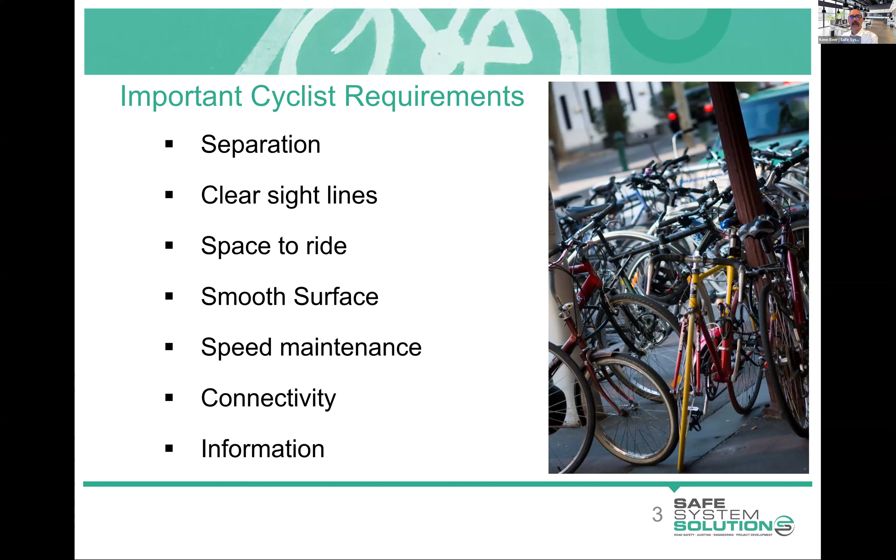So the easiest thing to do is to start by just thinking like a cyclist. The advantage we have is a lot of road safety auditors either are regular cyclists or have ridden bikes. So it's not that foreign an idea to be able to think like a cyclist and ask yourself all those logical questions. You know, how would I turn here? What would I see? Would I feel safe using this area? If I turned here, would cars see me? A door's going to open in front of me here. All of those usual sort of common sense questions.

The prompt lists I took you through at the end of last session, there is a prompt list for cyclists, and it will ask some of these questions to guide you along. And in some road safety audits, you might just decide, well, I want to ride a bike through this area just to get that feel of it. I'll talk to you at the end about specific thematic audits like cyclist audits where you absolutely have to ride a bike through it, but you can decide to do that at any point.

But really interesting, cyclists, people that ride bikes, it's quite a varied cohort. We have young people, so we have kids riding, we have older people, but we also have within the envelope of cyclists commuter cyclists, recreational cyclists, cargo utility style cyclists, you know, they're moving stuff around. It's quite varied, and we're seeing more and more integration of things like e-bikes, and it's quite a mix, and it actually makes it quite hard to design projects to cater for cyclists as a cohort.

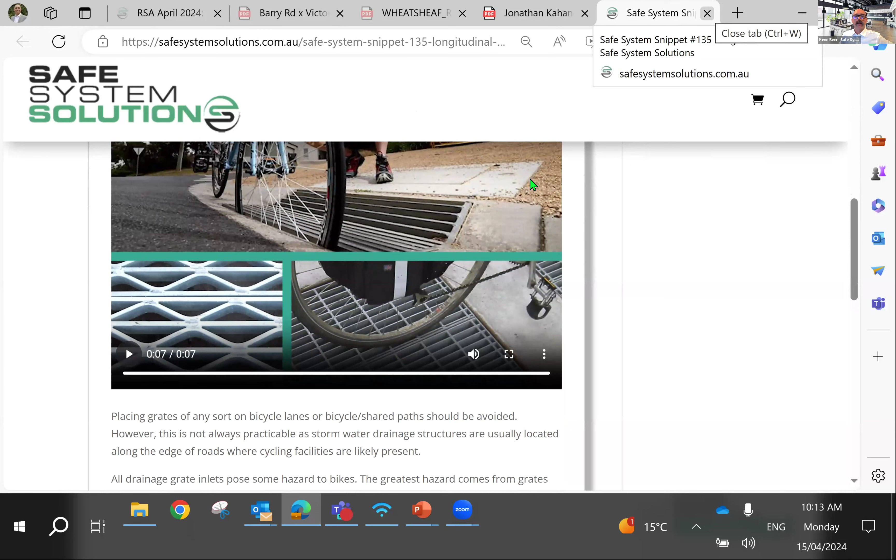Here you can see there's some bicycle-friendly grates. That's the common bicycle-friendly grate you'd expect to see. You can see these ones on a bridge, and there you go, cyclists going into it. Okay, get rid of that.

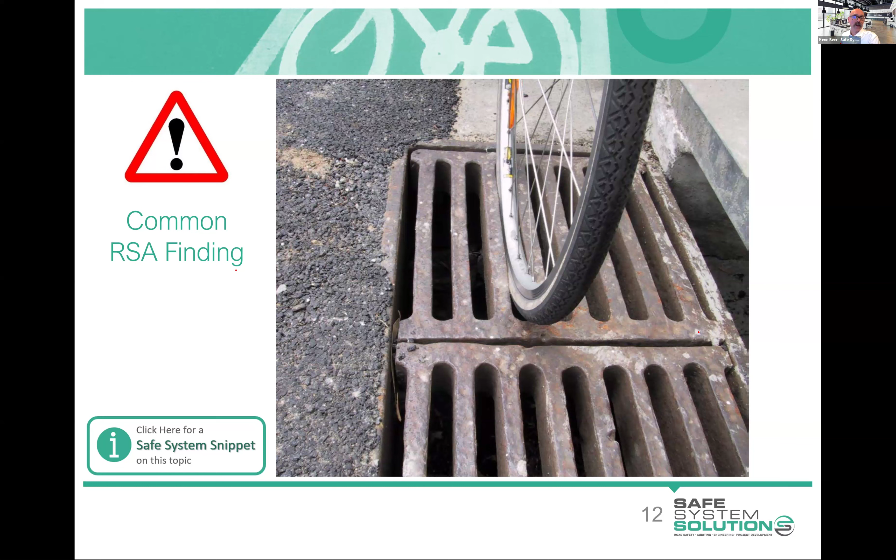I should say I haven't seen a longitudinal grate designed in a new infrastructure design for a very long time. But what I do see a lot of the time is that something like this exists, and they're doing upgrades to an intersection or changes, or sometimes even bike facilities, adding bike lanes, and they haven't identified that that's there. So they're not planning to change it as part of their work. That's where it often comes up.

This one, not as common, but signal phasing is probably a common one for cyclist safety. This one, they were doing all these bike upgrades on Sydney Road, adding green paint, bicycle storage boxes, some threshold treatments, and they were putting a bike storage box out the front of this set of traffic signals as well.

Except when you get out there and stand there, you notice they run the lights with green lights for those coming out, but also a left turn green arrow. So that's going to give the scenario where cyclists would possibly be coming up and storing at the front here. That's the purpose of those boxes, to get the bicycles in view so the cars know they're there. But cyclists might want to be going straight, and a vehicle behind them wanting to turn left.

As an audit team, we had long discussions about how you risk rate this, because we don't think anybody will miss this cyclist right in front of them, and we don't think anybody is going to intentionally mow them down. That sort of drifts outside the scope of road safety auditing to a degree. Anything in that intentional act stuff is not really road safety audit, nor is road rage, which was the big one we were worried about, because there'd be a driver coming up, beeping the cyclist, going, I'm allowed to be here, I'm meant to be here.

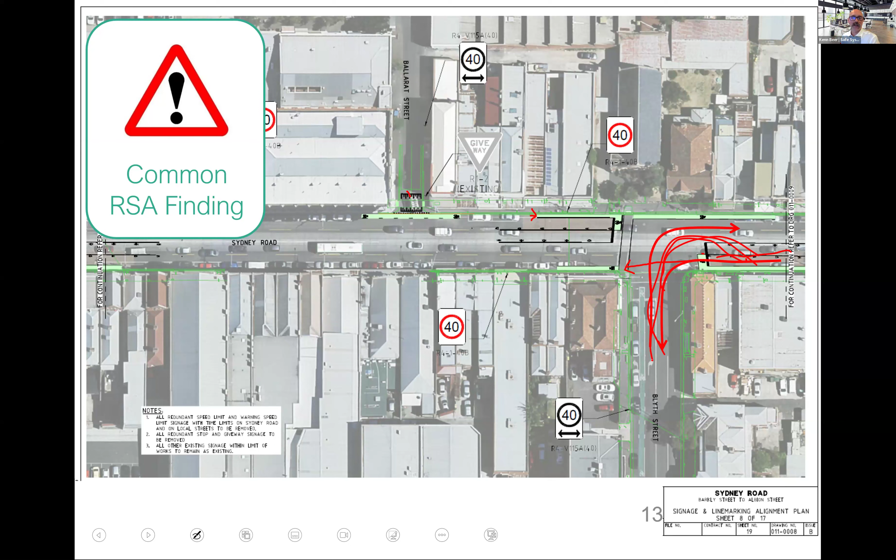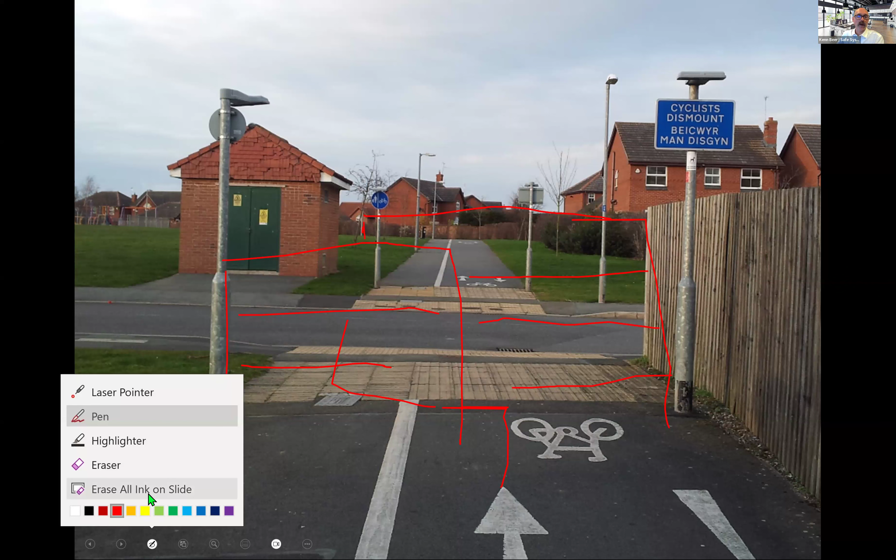That's been very strongly opposed by the riding community. It's not necessarily from a safety perspective, but it's things like a cargo bike just can't get around it. Any longer bikes, bigger bikes often can't get around it. It's a big disruption. So that's generally frowned upon. From a safety perspective, we know they do a reasonable job, but you've got to be a little bit conscious as an auditor making recommendations on something that's really against other design practices for one reason or another.

The advice these days is to more do it with things like splitter islands to try and slow and create that really clear point. But yeah, you'll be able to provide some advice as an auditor, and they'll take on what they believe is appropriate.

I thought I'd show this example of an audit that was done quite a while back, a slightly different form. Oh, it's kind of the same, but the interesting thing about this one, let me give you the background. So this was a big subdivision, and it was completed essentially. The civil public infrastructure works had all been done. They were building houses out there, and they had decided through that at some point to make their footpath a shared path facility.

Anyway, so that was one thing that was asked to be looked at in part of a post-opening road safety audit. And that's okay if your client sort of guides you at a particular issue they've got. You're still going to look at everything else, but you'll look at that issue.

Anyway, we looked at it and then identified that in some of the locations there was a high fence and the garage was there, and now we had a shared path and we had the vehicles coming in and out. And really, we were then encouraging cyclists, and cyclists of higher speeds, to be using that area.

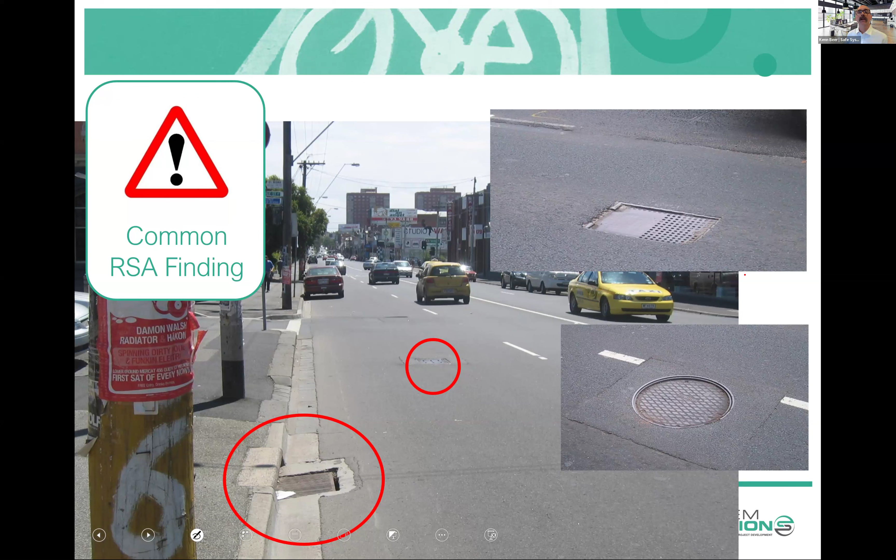Now, surface issues. We've got pits, grates, pit lids, surface covers, all these things in the road environment. Cyclists will potentially be destabilized by these, but they will also avoid them as they see them, so they change riding lines, and that can actually pose some dangers. Just have a think about that as well.

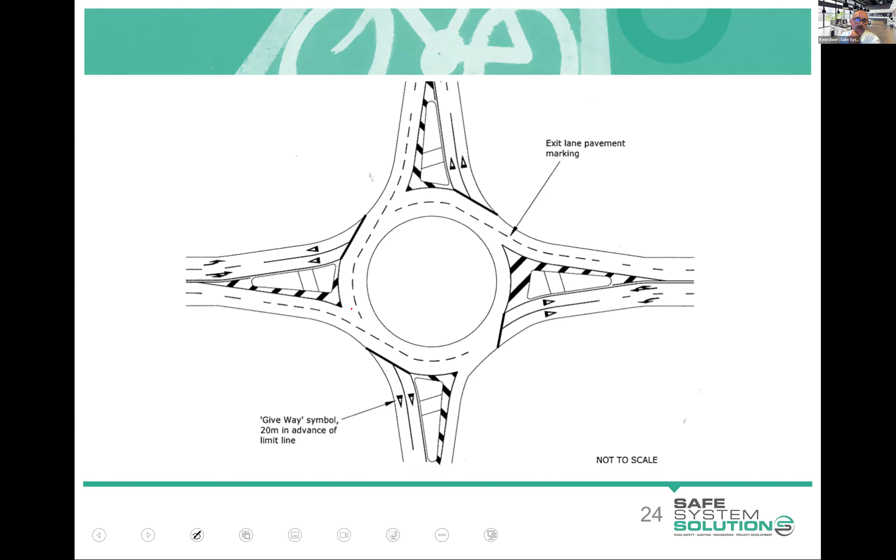I'll come back to some more best practice design for single lane roundabouts, but I'll just explain the complexity of a 2-lane roundabout if you've got a cycle route through it. The Dutch will just say, okay, if it's a 2-lane roundabout, it's grade separated for cyclists - they'll have their own overpass or underpass. But in Australia, we do have a lot of this, so we ask: are there facilities we can provide? We have tried different designs with some features for cyclists, separation at the roundabout - that bit of separation does help, not mixing them in the traffic, and providing facilities to get through, better sight lines, better angles, better storage points. But it is a very hard scenario.

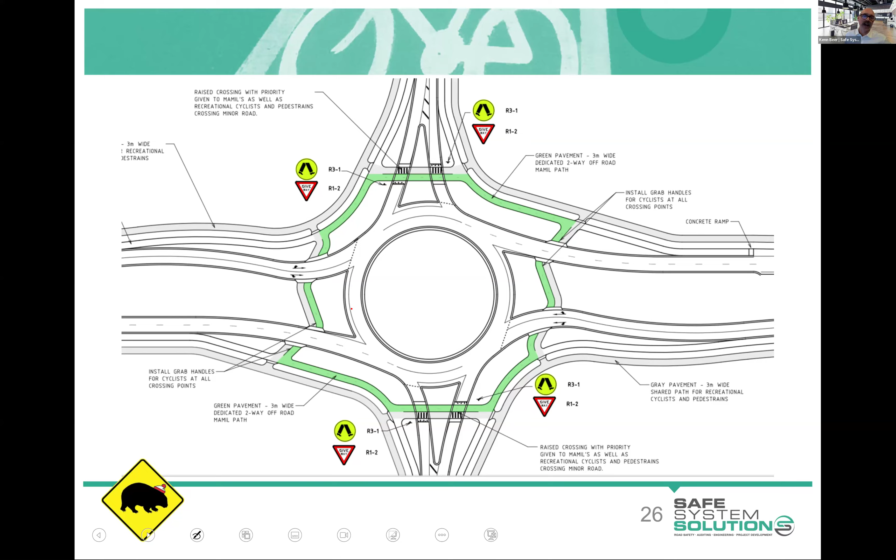The single lane roundabout, though, where we understand best practice is Dutch-inspired protected roundabouts, where you have a circulating carriageway for cyclists and pedestrians, if you have pedestrians there as well, and then an inner circulating carriageway for passenger vehicles or other vehicles.

So you can see that one here, that's Moray Street. There's a link there to another snippet on this one. There's pictures of it built, and you can see the cyclists can get on that and circulate around where they need to go, protected away, with a bit of buffer area for the vehicle. You can see coming in here, it can store here, waiting as cyclists come up, and the other vehicles can get around. So that works pretty well.

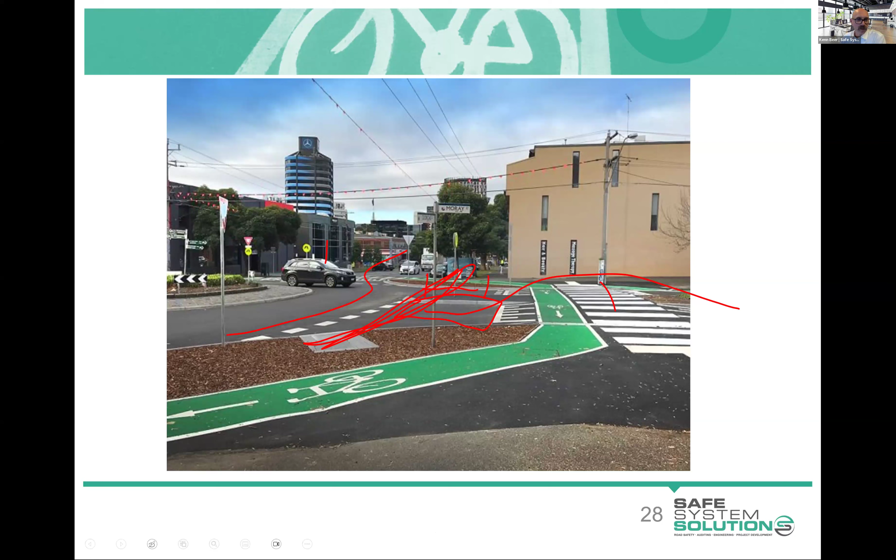That's a helpful one as well, because the driver can get into there and wait, as opposed to if you have your crossing point right up here, then vehicles are usually storing over the crossing point for cyclists or pedestrians. Sure, if you've got a longer vehicle with a trailer or something, you're still going to be hanging over that. But this works really well.

We did evaluate it. We had cameras out there for a few weeks, monitoring things. Really great compliance - high 80% of cyclists using the facility, with others just running through like a normal roundabout. But lots of good use of it, and vehicles slowing down nicely, giving way. We were really impressed.

As auditors, we're going to see a lot more designs come in that are trying to be more proactive in encouraging riding, and that's great, we do want to see that. Our role is to ensure that we are having that safety focus on it. We can get caught up as an industry pushing for something that increases mode share in a particular mode at the cost of safety. Our role is to ensure that it's not at the cost of safety, that we're doing it in the safest manner. Now, a lot of the time, improving safety improves mode share too, you get more people riding and walking because we made it safer. But occasionally it may not.

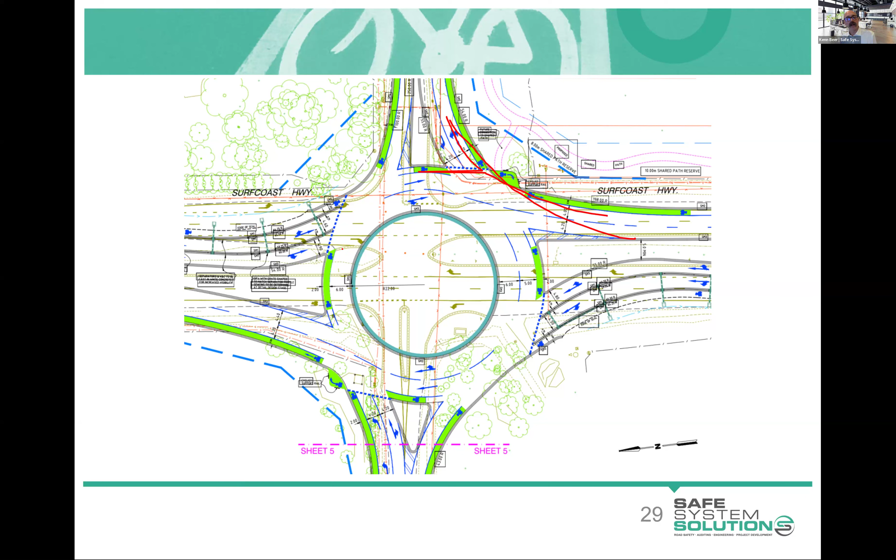This one was an interesting one where they were proposing this little two-lane roundabout, very hard, as I say. Everybody's trying to innovate, trying to come up with new ways to do this. So they had some separation, and then for the right-turning cyclists, there was going to be an area to prop and wait. The audit team was concerned with a couple of things: understanding who uses this area, the fact that these are recreational cyclists and there's a few of them coming in - not many would be able to prop here, maybe one possibly, but the others would spill out. Second, you've got larger vehicles coming around, and we know this area is a little susceptible to a sweeping vehicle, so it's not great from a storage perspective. So it's probably not the best, though we appreciate they're trying, and we can help them think about other options or other ways to design it.

This is an interesting one out near Traralgon. At the design phase it looks quite impressive in the sense that they're planning a dedicated cycle facility through the roundabout, a separated cycle facility, which is great, so cyclists aren't mixing with all the traffic as they go through. Now, it didn't cater for the right turn - I haven't got that second sheet on there - but the bulk of the traffic was going straight through, as in cycle traffic. So it all looks good.

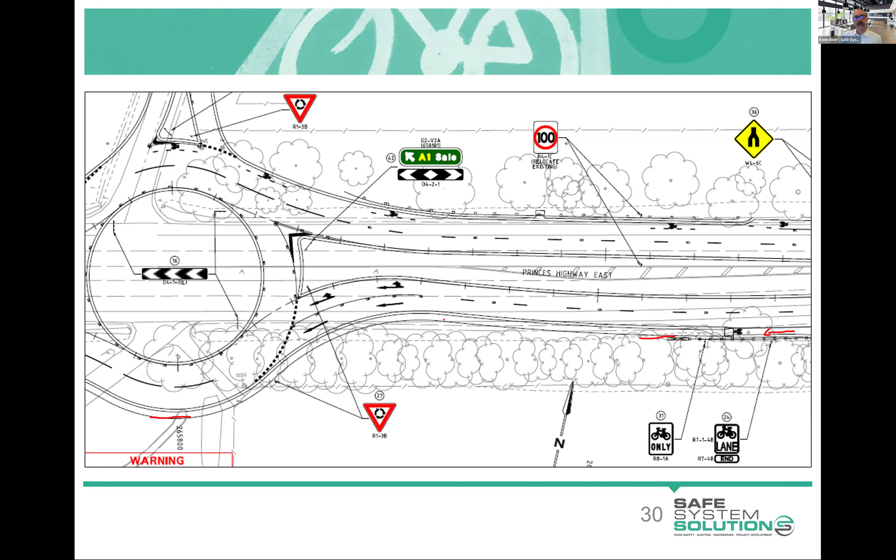But the important thing is thinking about how it then gets rolled out, and why post-opening audits can be really helpful. Once you get out there, you go, I don't know if cyclists would actually know that that's meant to be a cycle facility. We've got a little cyclist-only sign, but it's pretty small, and cyclists coming up here may just enter into traffic. So I think the little tweak of adding just a bit of green paint there would have absolutely done the job, to just say that's for cyclists and up you go, you get your own separated area.

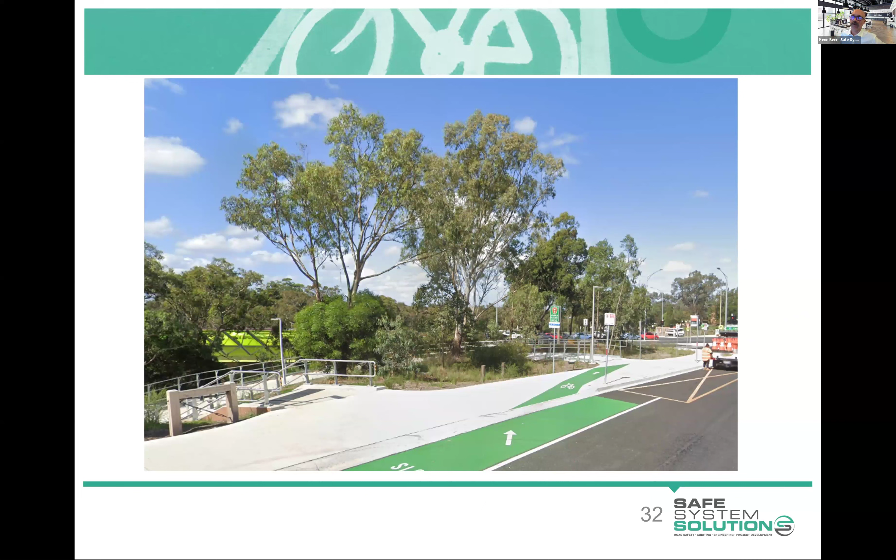Now, it's not the traditional use of green marking on the pavement. Green marking on the pavement was traditionally done at a conflict point between a vehicle and a cyclist, to alert the vehicle driver that a cyclist could be coming at this location, and to be more alert. But as you can see, here's another example of where it's used to try to guide cyclists to a particular point. There's an underpass here, and they're trying to encourage cyclists to go under if they want to go through. So it's a different way of using green marking.

Dooring is another issue that you'll be identifying as an auditor, no doubt. Dooring is simply opening the door in front of cyclists. The bulk of the deaths we've seen around Australia and New Zealand associated with dooring have actually been a secondary impact - they hit the door, which doesn't kill the cyclist, but it's where they land then in traffic and are run over or struck by faster moving vehicles running alongside. The hitting of the door itself can be pretty serious too, that's for sure, I'm not saying that's not an issue. But this has, and continues to, cause a lot of challenges. We have areas like this which are extremely challenging - again, Sydney Road.

The reason it's so challenging is that it's a clearway. So at points in the day, if you wanted to just paint all of that green, at some points of the day that's the middle of a running lane. And just painting it isn't actually going to really alleviate that issue so much.

So here, this one isn't a clearway, but this is the site of one of those dooring fatalities, and it's marked and it's there, but we aren't really providing the best facility to separate there. But Copenhagen-style bicycle facilities are what we know is extremely effective in reducing dooring issues. That's where you put the cyclist at the curbside and you put any parking out into the roadway.

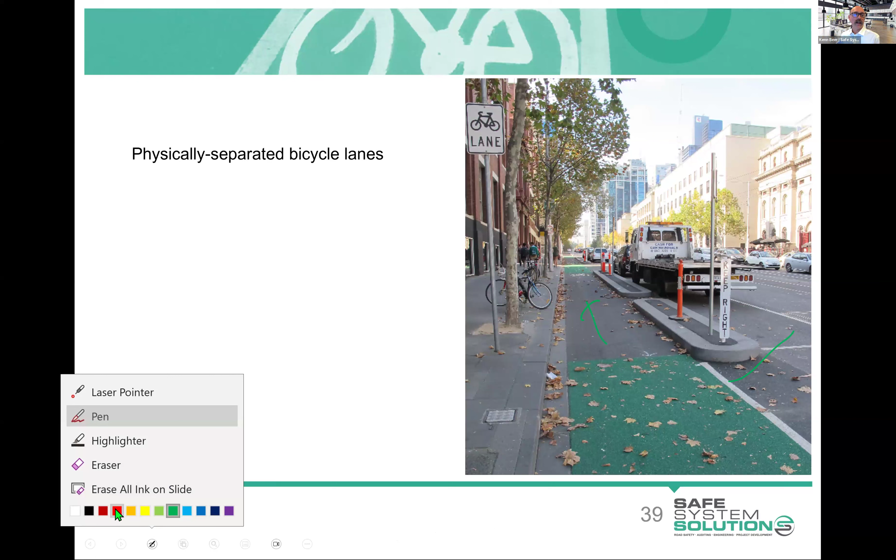And if you undertake road safety audits of facilities like this, it is inherently safer, but there are tweaks that can be done to make it even better. Some of the issues we have are certainly around these conflict points where vehicles are coming in and cyclists are coming up, and we don't have the best sight lines, often because of parked vehicles. So you can talk about where parking would be.

One little trick and tip, and I put it in most audits of these that I do, is to make the turn point a sort of cobblestone or a raised area, just to really slow the vehicles right at that point. So the cyclists have got time to see, okay, a car's coming, and slow down. Are they going to stop? The vehicle sees the rider.

There are other bits and pieces and tweaks which you pick up when you're out there on the ground or looking at the design and pondering how a pedestrian is going to handle this, how disabled parking is going to work, that they can get to a point to get up. And drainage is one where it's more in the design. Rarely as auditors are we picking on drainage things, but they'll create gaps and bits and pieces in order to get the water through. So we think about how that plays out from a safety perspective.

Certainly the width of it, you want it to be wide. At some point, people will park in it and drive in it. We saw that for quite a few that were quite wide, and taxis used them as a storage rank for a while. And so you might have to think about the entry and how that's done.

And certainly the first point of it, you might have vehicles hitting it, cyclists hitting it, cyclists coming behind other cyclists, and you've got to think about how you pre-warn and line mark and make sure that it's very clear that they're going to come into something and they have to get to the left of it.

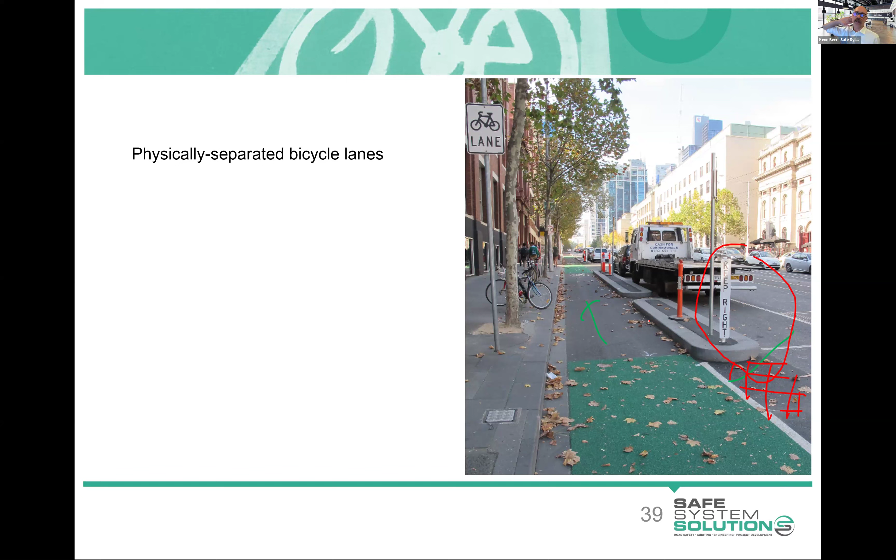So when you have a shared path and you cross a road, there is the option to give the shared path priority. This is a bit of a mess of road rules and how it plays out, because in a number of jurisdictions, you are not allowed to ride a bike across a pedestrian crossing. So they couldn't just make it a wombat crossing or a zebra crossing, because technically it would be illegal for the rider to ride over it. Now, the reality is cyclists just ride over pedestrian crossings anyway, but you can't really build things that go against the road rules, if that makes sense.

So this one is an interesting one where the design team have really been thinking about safety in the sense that they've put a barrier system to separate vehicles from getting onto this shared path that they're building. And so that's really great from that vehicle perspective. The bit that hasn't been thought about, though, is a cyclist striking the back of that barrier system. And if you've ever seen the back of those barrier systems, it's a pretty sharp, strong metal area.

And we certainly have seen some horrible crashes involving cyclists hitting the back of those barrier systems, and runners as well. But the cyclists are obviously going more speed. So you can look to back-to-back W-beam them. There's lots of barrier products available, like ones that are much thinner than this as well. So back-to-back systems, plastic covers, post capping. There's lots of different things available.

Again, as an auditor, it's probably not your role to give them the absolute answer. Identifying the issue and telling them to have a think about some sort of protection on the back of the barrier system is a good one.

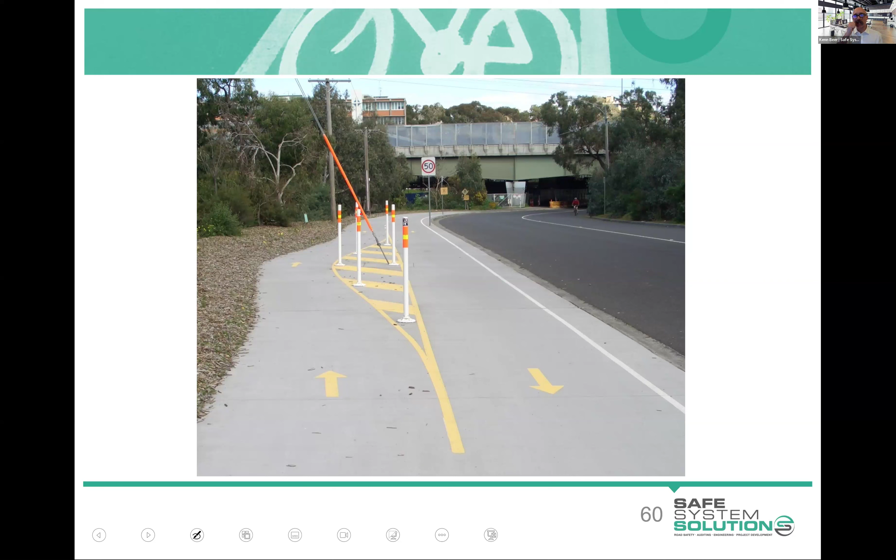We do have these thematic audit fact sheets, which we put into the learning management system, so you'll be able to have a look at them. They just explain a little bit of those. If you're asked to do a cycling-specific road safety audit, what is the actual difference? Because the process is still the same. It's really around how you go about it, that you ride the route, having a look at some specific features for cyclists as well.

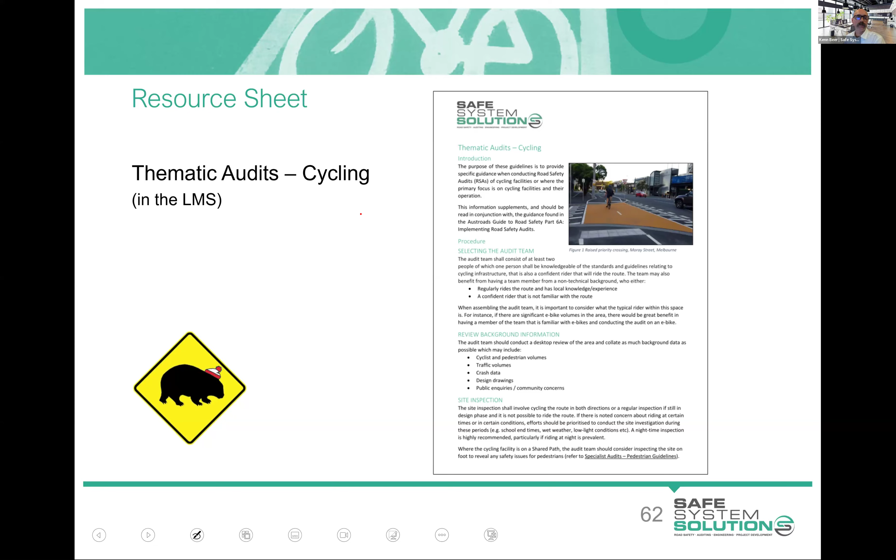Where are we going on time? It's right on the hour. I don't think we'll do that quiz, Loretta, if that's all right. I'd rather give people time to have a stretch, grab a coffee. Let me talk to them about motorcycles for a bit and give you enough time to take them through their audit findings. So what can we take? What do you say? 4 minutes? Sounds good. All right. See you in 4 minutes and we'll get back into it. Thanks.

Okay, let's get back into it. We're going to talk about motorcyclists. This is a road user group where a lot fewer auditors are motorcyclists than cyclists, and a lot fewer have ever been on a bike, or at least on a bike on the public road network. So I think it's important for us to get a few things in our mind about what to look for the safety of motorcyclists.

I was doing some Austroads work, and we're doing modelling of death and serious injury out to 2050 in different jurisdictions. As you start to see over the next 20, 25, 30 years, motorcyclists start to dominate our road trauma profile. Vehicles get safer, autonomy integrates in, and a lot of the road upgrades that are planned and coming online are protecting vehicle occupants, and to a reasonable degree pedestrians and cyclists. They're still overrepresented in these future scenarios, but with motorcyclists, it's eye-opening how much trauma there is.

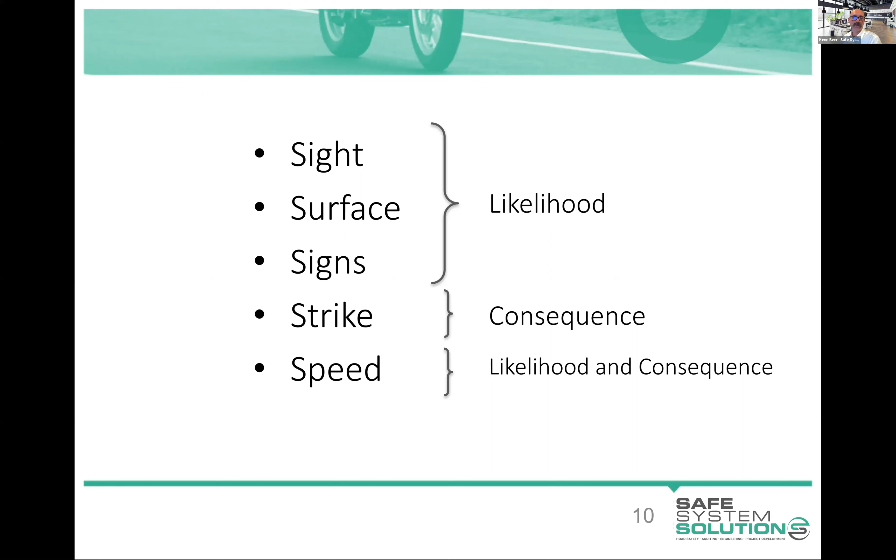So what I'm going to do is jump through each of these S's one at a time. I don't have a lot of slides on each one, just enough to spark that thought in your mind. If we think about a motorcyclist compared to a vehicle, they are smaller, so they're hidden behind objects more. You can see there, even a very small car, the difference in width.

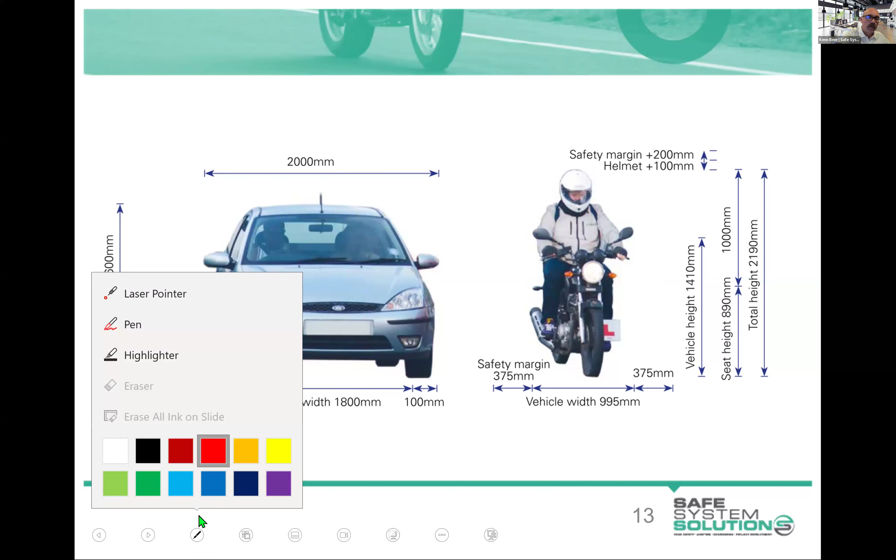So I'll give a question and give out some more prizes—make sure you're all back and listening. Why do you think, what is the purpose of this safety margin? Not that we would really use it too much. This is thinking about design envelopes for different vehicles, but why a safety margin that big when the vehicle's only got that 100 mil essentially, a little buffer? Any ideas?

Speed wobbles—that's not a bad one from Nick there. It's in the general direction. Saddlebags is another interesting one. Yeah, the lean is the one—Andrew's on it, kind of links a little bit with speed wobbles, though that's a slightly different thing. I like all three, but we'll give Andrew the prize. It is about the amount that a rider will lean to make turns around corners or curves.

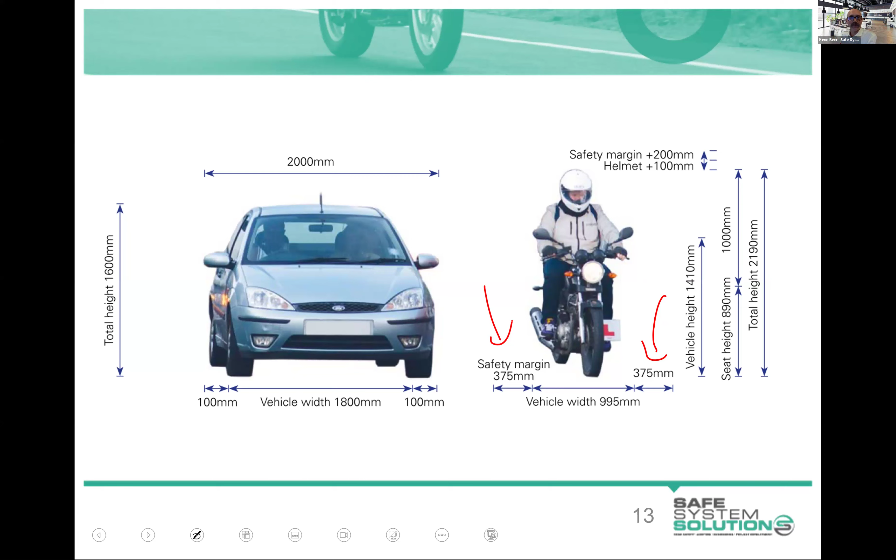We also want to think about where vehicles will prop, and that's, as an auditor, a really important thing to do. When you're given a design—an upgrade to an intersection or changes to the configuration of an intersection or an area—you say, okay, that's how it looks, but how will it then operate? Where will vehicles prop? What sight lines will be blocked by other vehicles? Just having a think a little bit about that. I'll show you a little site where that became an issue shortly.

So we want to provide riders with good warning of what's coming up, especially on those motorcycle touring routes, so they've got a really good understanding. Motorcyclists are very attuned to road signage, so we have the advantage that we can warn of different features and they'll react.

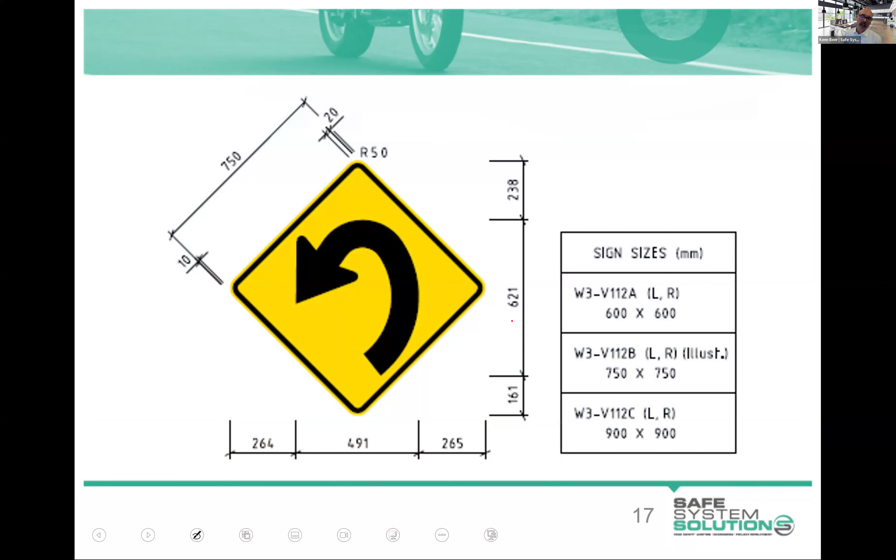This sign is used on the approach to a curve that tightens. Now, this is different to a hairpin curve, which would have one tight radius. This is one that tightens up. Now, I'll give a prize if somebody can tell me the technical term for a curve that tightens like this, that has two radiuses—one radius there and then a tighter radius.

Broken back—that's good from Mark, Mark can have a prize for that. It's not the actual term I was going for, but it is used. And Abe's got it: compound curve. Well done, there's a prize there as well. It is a compound curve.

Compound curves are extremely hazardous for motorcyclists. Now, they're not great for four-wheeled vehicles either, but this is a compound curve—and it's not even the most severe compound curve you'll find. A rider comes in and positions themselves, setting up for a 252 radius curve, and then it tightens up a bit. That means the rider is set at a speed, a lean, and a line, and then it changes on them. This has had 4 motorcycle run-off-road crashes to the outside of this curve. It probably also has an unsealed road dragging a bit of gravel on there, which compounds the issue. There you go—I just used an issue compounding an issue on a compound curve.

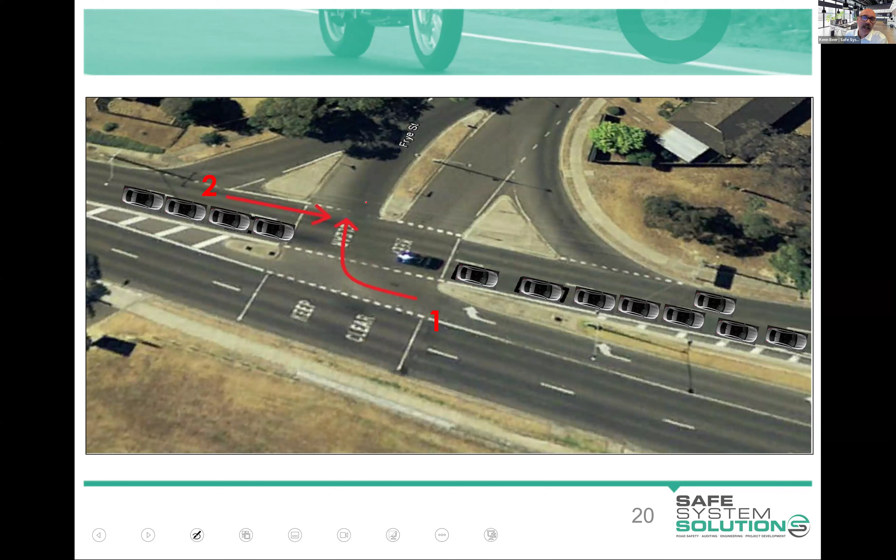So really, the principle to take out of it from an auditor perspective is that while some things we may not think about as sightline constraints, they could be. And if we have the ability to open up sight triangles from even small things like trees, signal controller boxes, different signage and the like, it can be helpful.

Okay, surface. So it goes a little bit back to that lean we were talking about. We talked about the lean from a design envelope perspective, but if you think about the lean and the importance of the surface, we have this huge reliance on the surface in the sense that the center of gravity has been pushed out, and all of the ability to retain staying upright is reliant on the surface traction there.

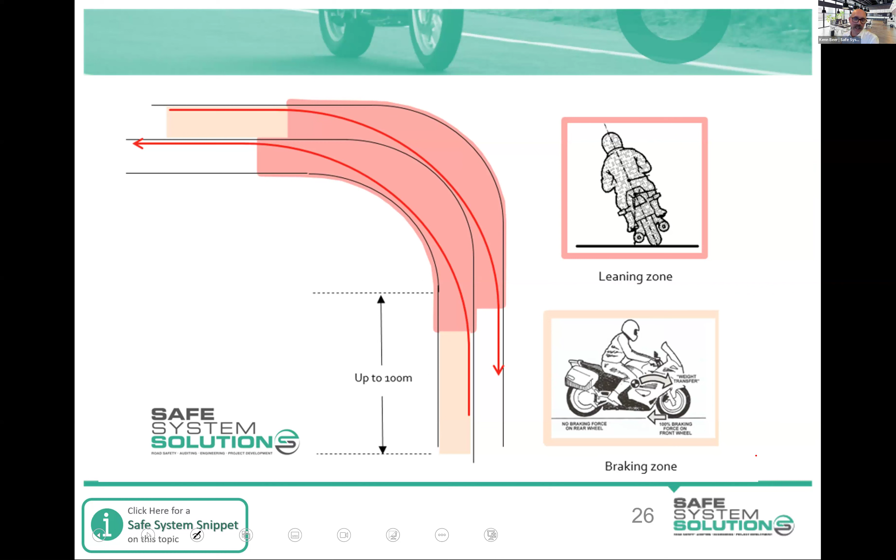So those are the areas. This is a diagram showing where a rider is leaning through a curve - that's the most important surface for a rider. The approach, where they're braking to a degree, and the rest of the road network surface can be an issue, but it's not as much of an issue.

So we want a really good, consistent, good grip surface - no surprises is what we want. Unfortunately, that's not what we see out there, is it? We see...

Depressions in the road - that's one I've done a couple of motorcycle fatality reports on now, associated with riders leaning on popular touring routes, where there's been a depression in the road like this. And what it does - it hasn't knocked the rider off, but on both occasions the rider has had to pull the bike upright and go into the opposing lane to hold control of it, and been struck by a vehicle coming the other way.

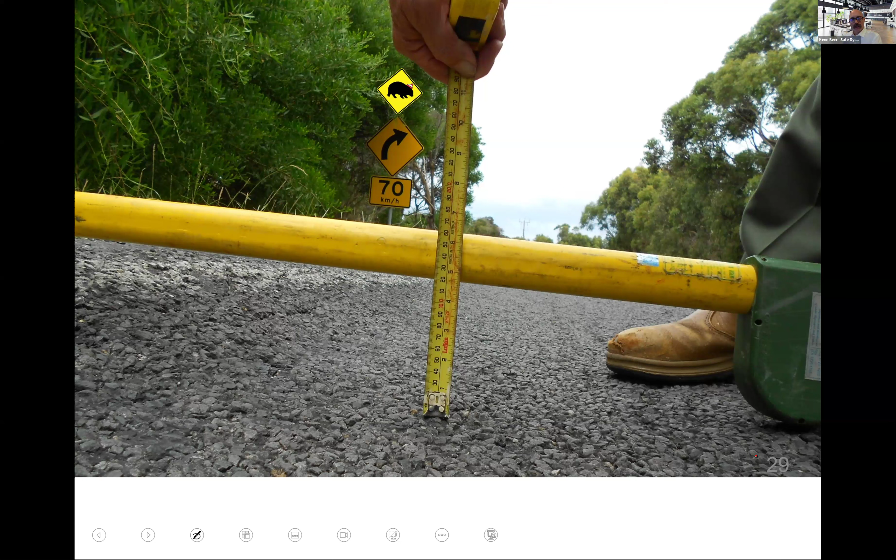So these depressions in the road - I mean, this is going to be an issue for pretty much any road user - but different potholes and those sort of things, obviously issues. Any sorts of surface changes can be an issue.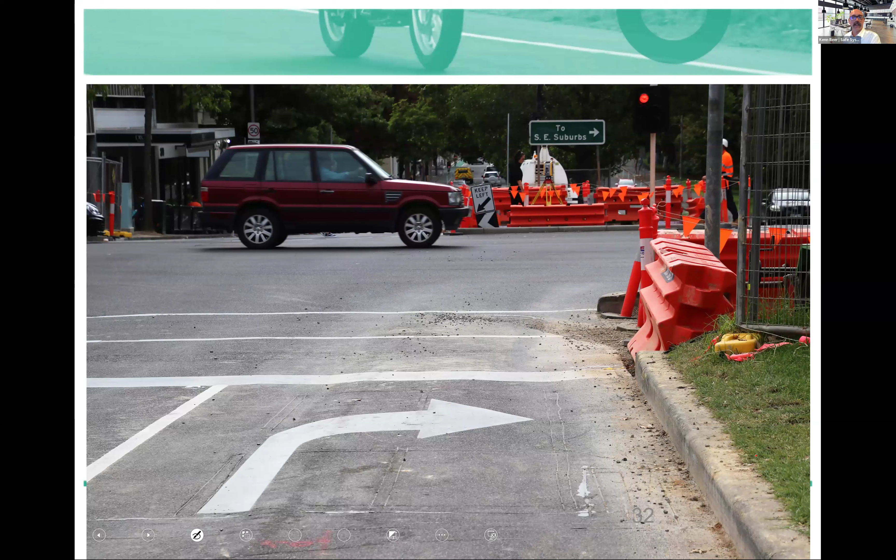Around work sites, the debris, the gravel and things - this isn't at all the worst I've seen, but I had an immediate photo of one where we've got to think about motorcyclists, and we're seeing a lot more of those food delivery drivers and those sorts of things. I think I have a picture later of steel plates, but that's also often used around work sites as well.

And also scouring out of the pavement, leaving drops and lips and things that really are enough to destabilize motorcycles or bicycles for that matter.

Patching, and where we have the connection there, often in the riding line, things will break up. So if we're able to do full width patching, that's great. And anytime we do have these sorts of issues, we really want to warn the rider in the time it takes to actually rectify the issue.

This is a very problematic one. It's on a popular motorcycle touring route, around a curve. A rider is going to be coming in, and really they're locked into a line and a speed, pretty much. They don't have the option much to go inside this - all they could really do is go outside it, or pull the bike upright and try to regain that, which would put them onto the other side of the road.

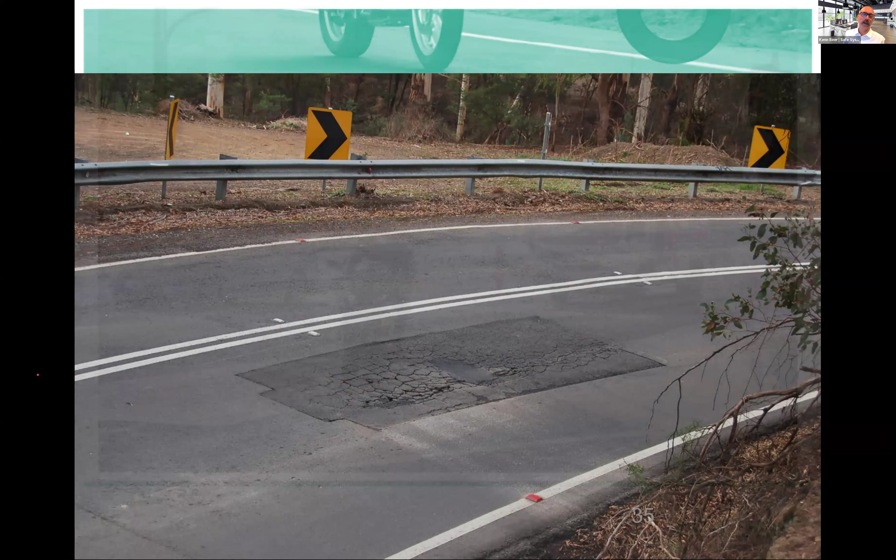Try not to do that, and we certainly would pick it up as auditors. It's going to be unavoidable in some situations, but certainly warning of it, adding skid resistance surfacing to it, because when it's wet and dark and the motorcyclist is following behind other vehicles, it can be a pretty hazardous scenario for a rider. And there are good different treatments available.

Any pit lids, services, anything you're going to see in a design that's in the circulating carriageway or roadway at a design stage, we want to try and get that out. And if it's there already, we want to try and highlight it better. So it's one at a roundabout, and you can think that a rider's leaning a little bit. They're also very much looking for all these vehicles that are going to pull in front of them and where they're going.

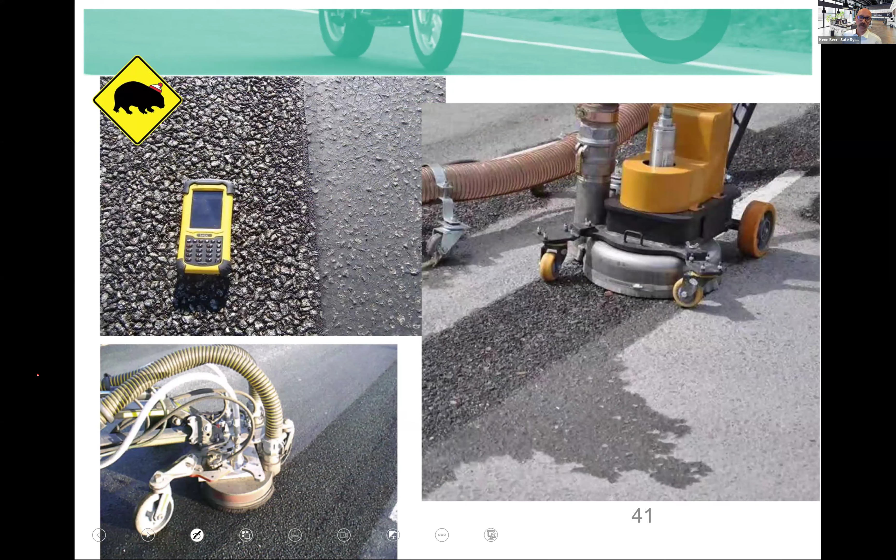Yeah, we really don't want that sort of stuff. And improving surface conditions, all sorts of ways we can do it with water blasting or different high skid resistance surfacing techniques and the like. So lots of options available to us. There's some high skid resistance surfacing as an example.

Sealing right up to the edge of a barrier is another thing that assists motorcycle safety. A rider, if they were to go into a curve too fast, and it's an unsealed area, they really have to pull the bike upright or they're off, and that's it.

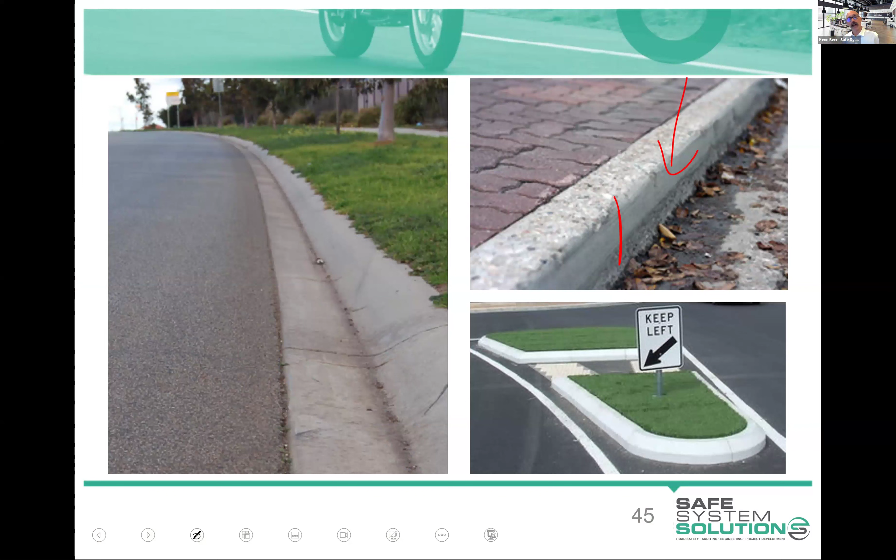And curbing—the more mountable the curbing, the better for a rider. It just gives them a chance to stay on the bike. Barrier curbing, which is this one with the vertical surface, that will knock a rider off. And in fact, it doesn't need to be a big lip to knock a rider off. So if we are doing concrete aprons or anything like that, we want to be clear at highlighting that.

Okay, so another surface thing we use a lot of is line marking, and line marking can be slippery. Thermoplastic line marking, when wet, after it's been out there for a while and polished up a bit, becomes a slippery surface. So we just don't need to use big swathes of line marking like this. There's other ways to do that, and we want to be very careful with it.

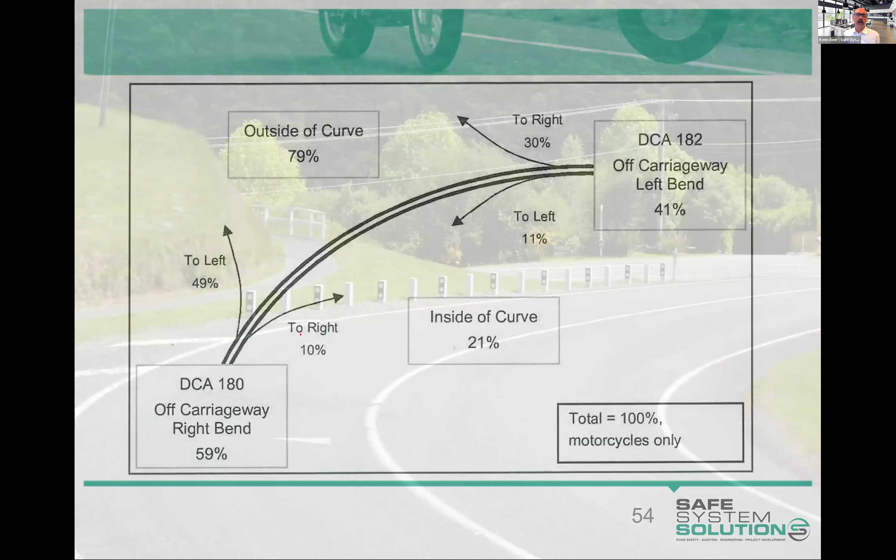Motorcyclists leave the road on the outside of the curve predominantly, and that's where we see most of the crashes. So we really want to think about how we are treating the outside of curve on popular motorcycle routes, and really other routes as well. Here you can see we've got a bit of a surface issue, which isn't going to be great.

Galvanized steel posts - ASBAP, the Austroads Safety Barrier Assessment Panel, who look after roadside hardware and approve things - well, they don't actually approve things, they endorse them - but they have this category of stuff they say is deemed frangible. So they say, well, we deem that frangible, meaning that even in areas you're trying to make clear of hazards, you won't even consider that a hazard. And they would call standard galvanized steel posts deemed frangible.

But I'll tell you now, they're easily strong enough to kill a motorcyclist. So the deeming of frangibility by ASBAP is for passenger vehicles. It is not for motorcyclists.

So what I say is, of course we need signage out on our road network, and of course we need sign support structures for it. First and foremost is to think about, can we just get rid of some of these? Can we consolidate these? Do we need this one? Probably not. Can we combine these two? Probably yes. There's opportunities immediately to try to lessen the amount of signage out there.

Then in some situations, you may consider a more flexible sign range. Certainly low mount signs - there's quite a lot available on the market. We have these sort of compressed rubber ones. We have ones with hinge points at the bottom. Different things that you can use.

So for the rider sliding, having separated from the bike and sliding along, we have underrun protection available to us. I use the term underrun protection - there's a variety of types of ways you can do it. A lot of people talk about rub rail. Rub rail is one of the products available. There's MPR, Biker Shield, and a few others.

So that's quite effective. You can imagine a rider sliding along off their bike, hitting a post. They're going to abruptly stop, and that's going to be a pretty severe incident. With the underrun protection addition, they slide, they hit that, they run along it a bit, and it's less severe. That can be retrofitted to existing barrier systems.

So Type B, W-beam in Victoria, and G4 systems - Type B for Tasmania and Victoria, and then a G4 system for the rest of Australia is what I'm talking about there. But big common W-beam systems, you can retrofit it. The manufacturers have - some of the new products like EasyGuard and Century Barrier and things - have their own motorcycle underrun protection systems as well available.

So here's some crash testing involving a motorcycle crash test dummy. This is European crash test protocol. You slide a dummy at 60 kilometers an hour into the post, and yeah, that kills the motorcyclist. That's a dummy, but that's enough to kill a motorcyclist. With the addition of underrun protection, okay, it's not a friendly thing, but it's survivable, and it's within tolerances. It gets a pass. But remember, that is just at a 60 kilometer per hour impact speed. So I think that's just an indication of the limitations of trying to absorb energy of an unprotected body, essentially traveling at speed. So there's still work to be done.

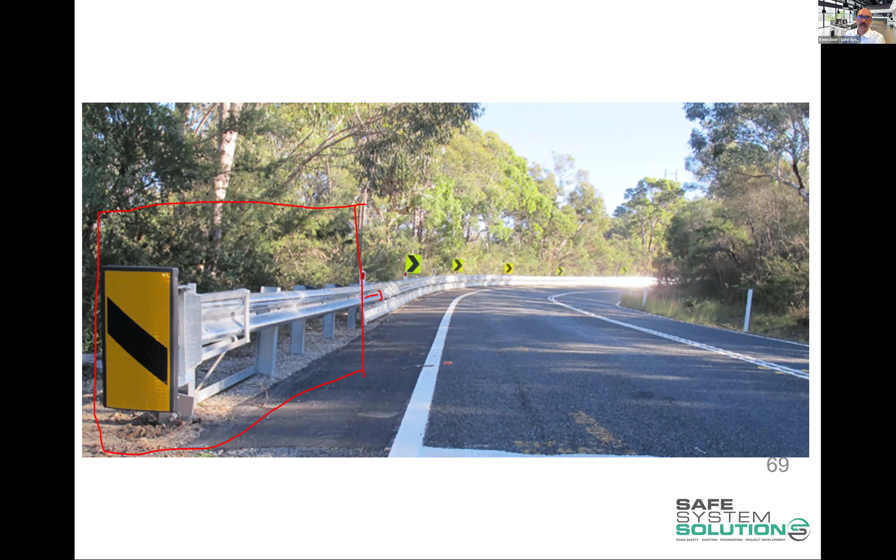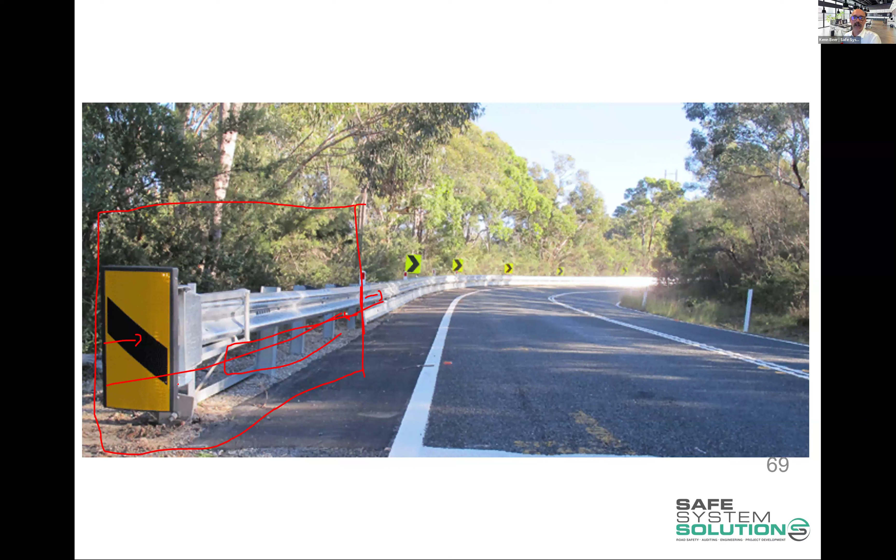Andrew's on it - end terminal operation. Well done, prize there for Andrew. So for those who don't know barrier systems too well, that's the end terminal. That's actually a different product compared to the rest of that. This operates - when struck by a vehicle, it sort of concertinas on itself. That extrudes - that's an extruder head. This one extrudes the barrier system out, collapses on it. It's never been tested, and nobody's got a product that's been tested that sort of fits on there. So the advice is to go as far as you think you want to put your underrun protection up this way, and then put your terminal on.

We don't want to compromise the safety of other road users - that's the reason we're thinking about that. Now, why rope safety barrier and motorcyclists? Mostly everybody understands this is not the issue that some very minority segments of the motorcycle community talk about it as. The research really shows that motorcyclists are in no more danger with this barrier type than any other barrier type. And in fact, we don't use this barrier type in areas where motorcycles are at most risk because we can't - we physically can't.

This is a barrier system in tension, and the areas where motorcyclists are most at risk are curves. Like on a popular motorcycle touring route on the Great Ocean Road or Waterfall Way or something like that, you literally just physically can't use wire rope safety barrier on these windy roads like this. You're looking down on it now. If you put a tension barrier system like that and tension it up, as you tension it, the posts just start to creak and then it'll pop. You don't use this in windy road scenarios. So yeah, it's a real storm in a teacup from some people around this.

The only thing that sort of has some merit is we don't have a great retrofit technique for wire rope safety barriers, like we have that underrun protection. So the best we had are these stack cushions or post protectors to go around each post. It's not going to be that effective. We know that just from basic first principles, because if a rider was sliding and they hit that, you're trying to absorb energy - it's like football goalpost padding, as opposed to redirect energy, which was the underrun protection. That sort of redirects energy and you get all of that distance to wash off speed and energy. So it's not going to be as effective.

The wires don't play a role like that. That was dismissed early on with research - there was this talk about wires slicing riders and being like a cheese cutter and these sort of things. Nothing. There's no evidence to that whatsoever.

The riders that have hit barrier systems up the top, they go over the top just like a rider would on any other barrier system. So yeah, but the reality is we just wouldn't use this in a lot of scenarios. It's used in long straight sections often because it's a very flexible, friendly barrier system for passenger vehicles.

This was one down to the Motorcycle Grand Prix. So this is the South Gippsland Highway, central barrier system. They put stack cushions on it because of the high motorcycle volumes on that road and high motorcycle risk associated with the sheer volume of riders that go up and down for the Grand Prix track at different points of the year.

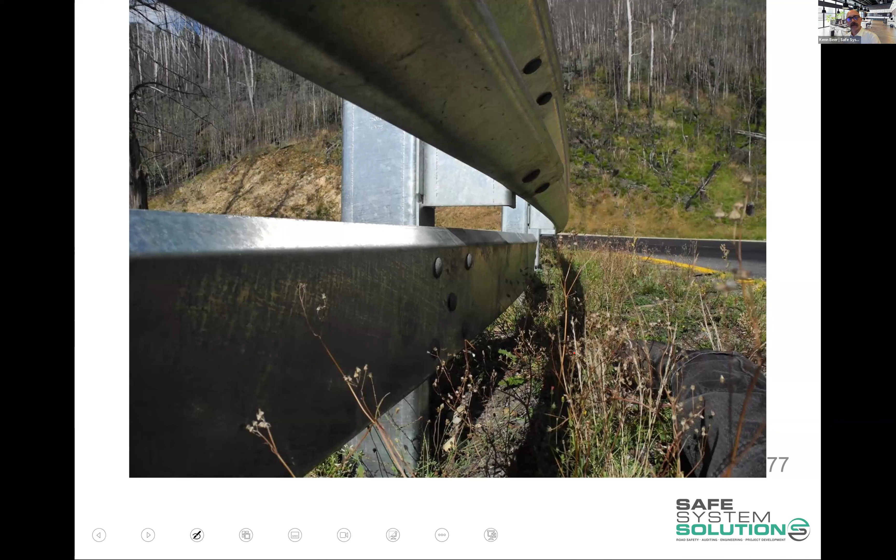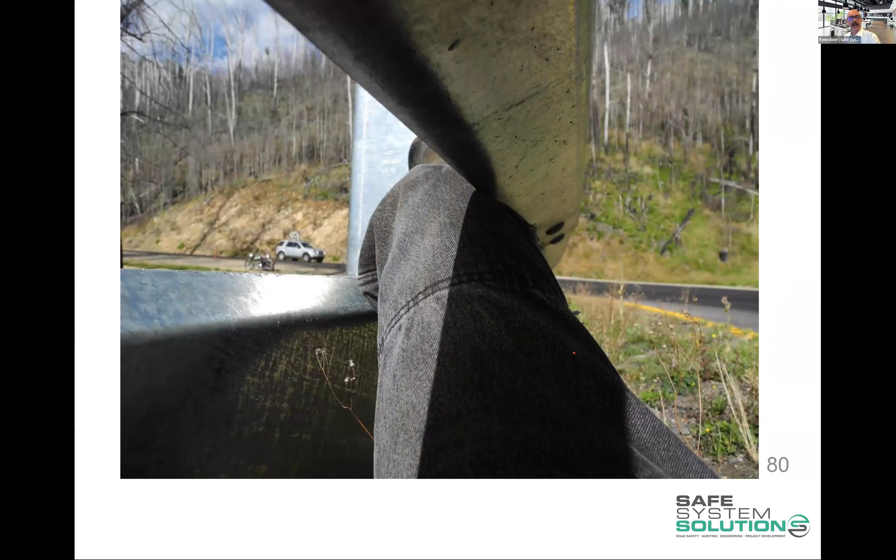A few photos there. A few little connection challenges. So those underrun, you just got to follow manufacturers' specifications. This was connected to the post instead of using the brackets to sit it out, which is a feature that's missing. And so that's going to potentially have arms or legs or things being able to go through the holes. And again, we see sort of holes and gaps and thinking about what we're running riders into.

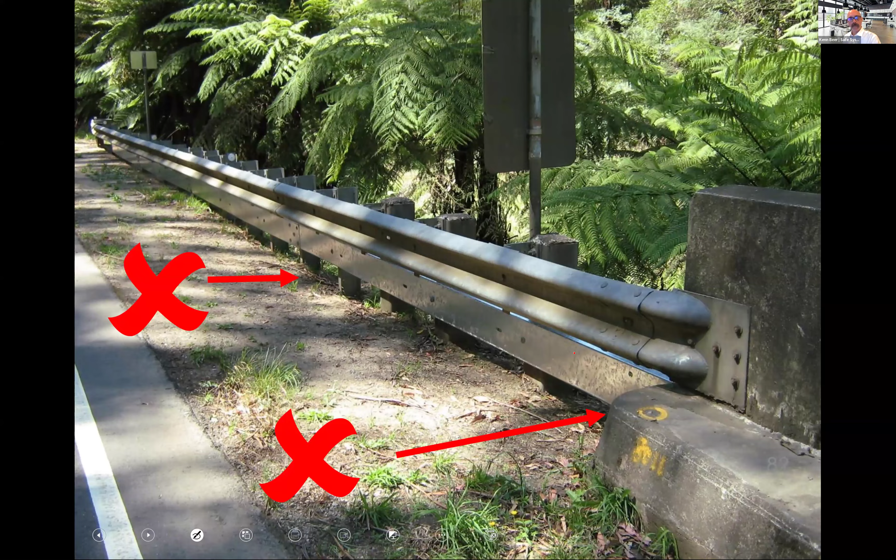And finally, speed. Well, we can influence speed of riders through a whole series of ways. One's the addition of things like chevron alignment markers, although remember I did mention that we are now adding hazards to the outside of curve here for riders. So we have to think about that. We're balancing there, lessening the chance of a crash, maybe increasing the severity of it. So that's why we were trying to work on some of these frangible poles for motorcyclists.

Advisory speeds, regulatory speeds, warning, all works really well and helps motorcyclists.

So just in my last couple of minutes here, I'll just mention motorcycle audits. So I talked about cyclist audits, which is where you'd ride through and you'd do all of that. Motorcycle audits are similar, but it's often that you engage with a motorcycle rider and pull them in as part of your audit team. They may or may not be a qualified auditor themselves, but you as a team will work with them. You'll discuss it. What are they feeling? What are they seeing? And you get some really good outcomes there.

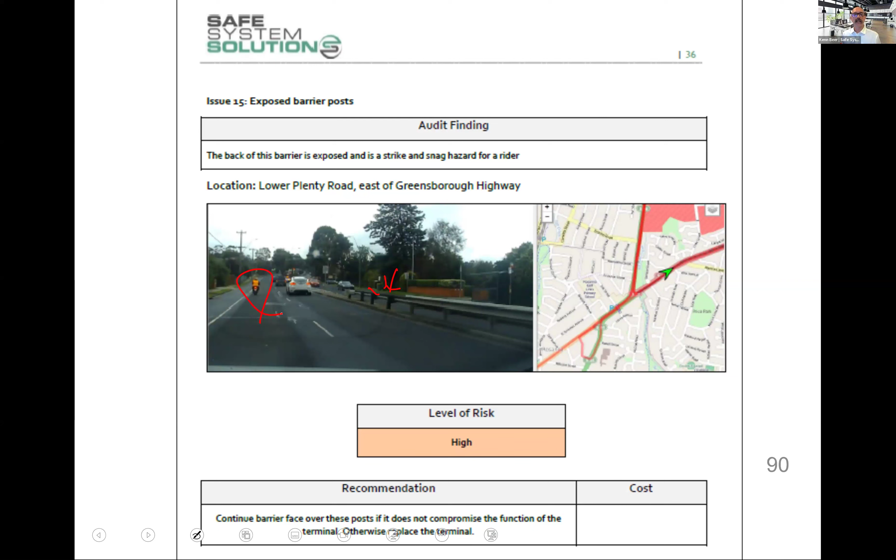A couple of examples of motorcycle audits. So at the back of the W-beam system there, you've got the rider out the front, mic'd up, talking about what they're feeling and seeing and concerned about, and you point out some other things. And we've got another one of these fact sheets for motorcyclists as well in the learning management system. I've pre-recorded a few things and put some case studies and some videos into the learning management system for you.

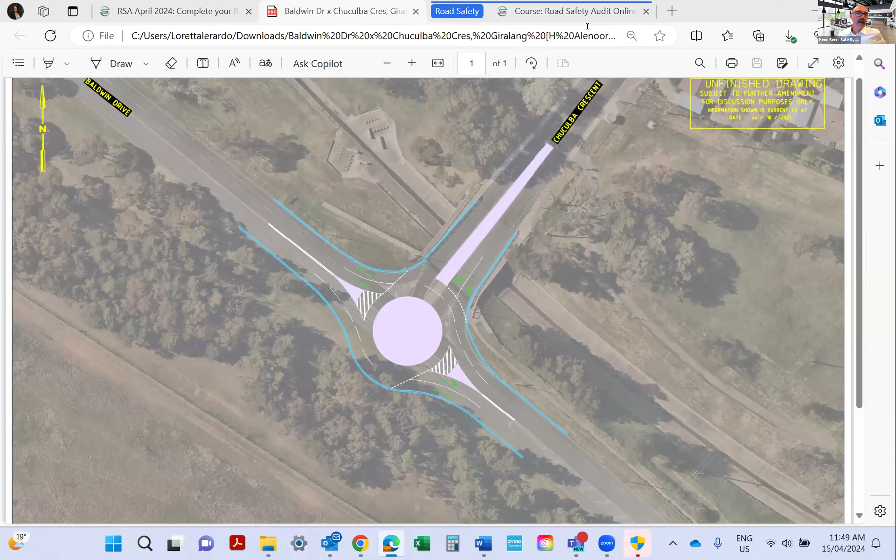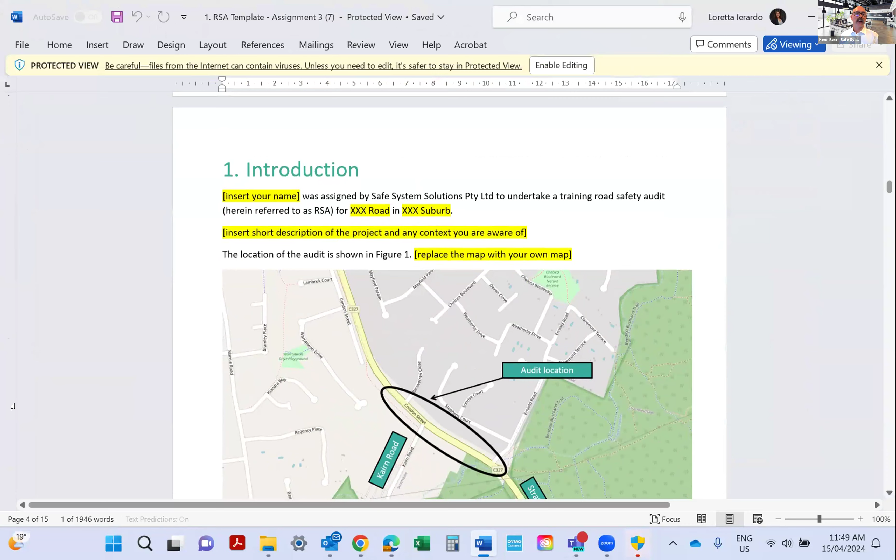So then you'll go to your Word document, wherever that's snuck away to, there it is. And anywhere there is highlighted yellow, you're going to have to do something. So you're going to write the name of the intersection there, and any abbreviations you use, you can summarize there. You're going to give us a short introduction, and you're also going to put a little snip of where this location is.

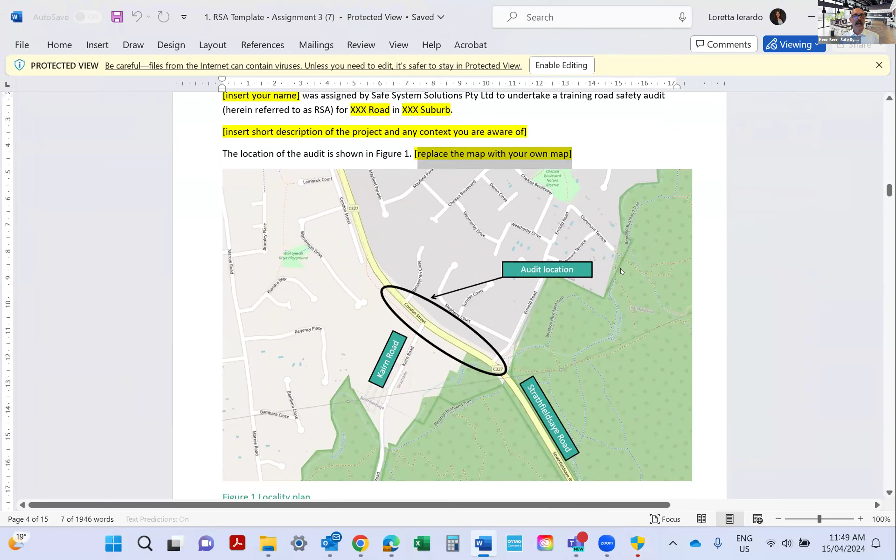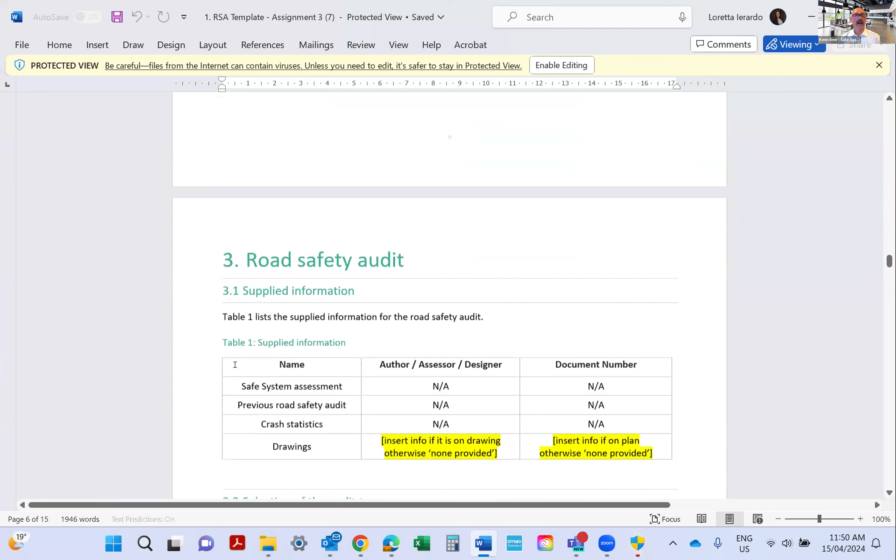And yes, replace that map. So then, little bits of information to change. Now, we've given you this template. You can use this as a real audit template in the future, so you're welcome to do that. Put your own branding on it, change your colors, whatever you want.

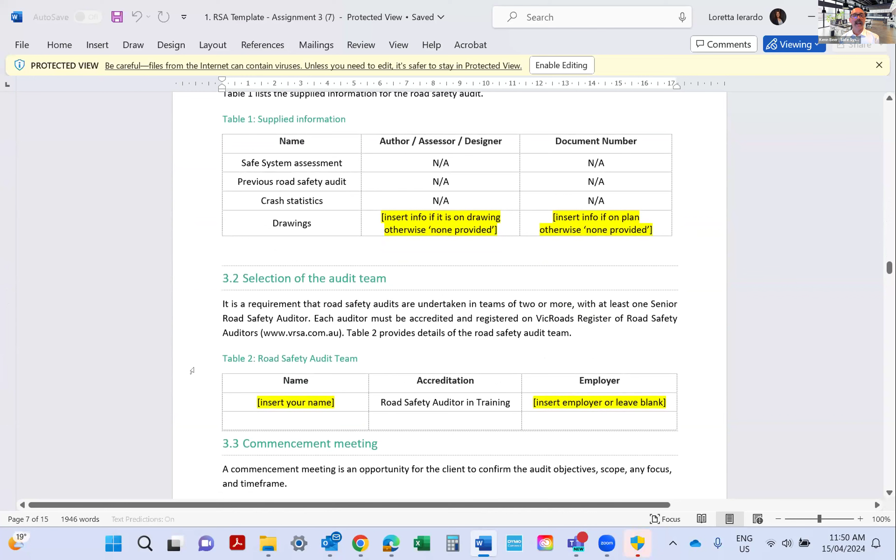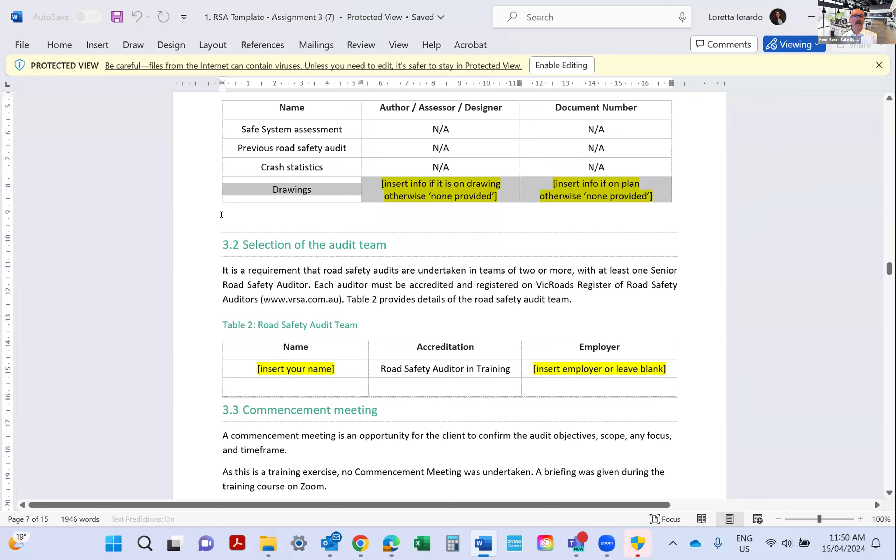This conforms with current Austroads guidance requirements, so please use it. That's why we've left a lot of that info in there, and you see what a real audit would look like. Now, for this one, if the drawing you get has a particular number on it, pop it in there. You might just say none provided. A lot of them probably don't have a number, but in real ones, you certainly would, and all the other information you'd get in a proper audit. But for this mock one, we've sort of streamlined it a bit for you.

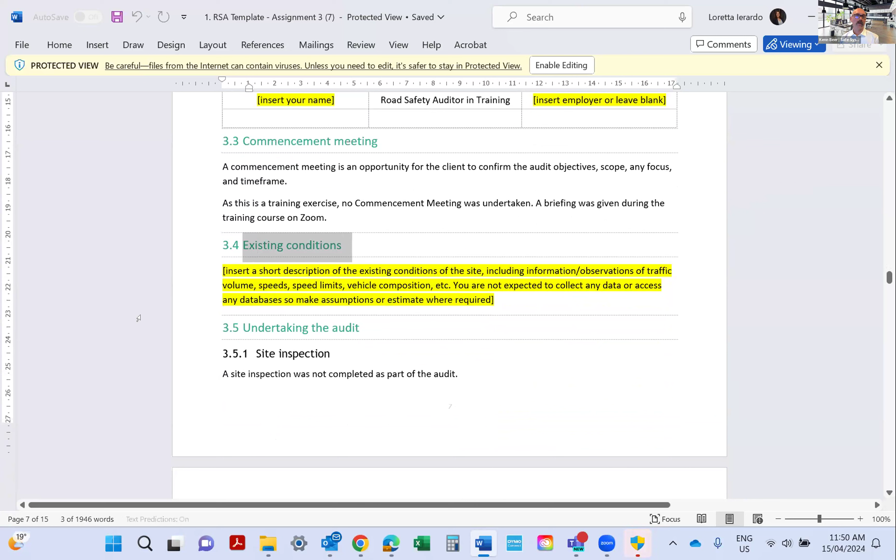You put your name in there, and put your employer if you want. You don't need to though. And you're going to give us a short description of the existing conditions. Don't give us pages and pages. Just briefly talk about the speed environment, it's an arterial road or this, and then keep going down.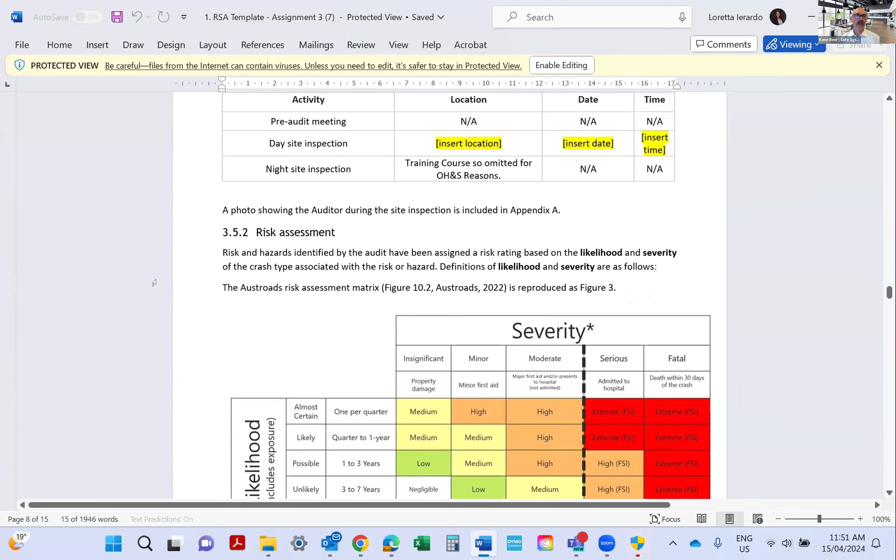And you are going to go out there only during the day. You'll discover this when you go through the safe work method statement, the SWMS that Loretta mentioned. We've assessed these sites. They can be done very safely as long as you're safe in your operations. You don't go out there intoxicated, and you don't go out and try and measure lane widths or anything like that. You stand back, you just observe. So that's in the safe work method statement.

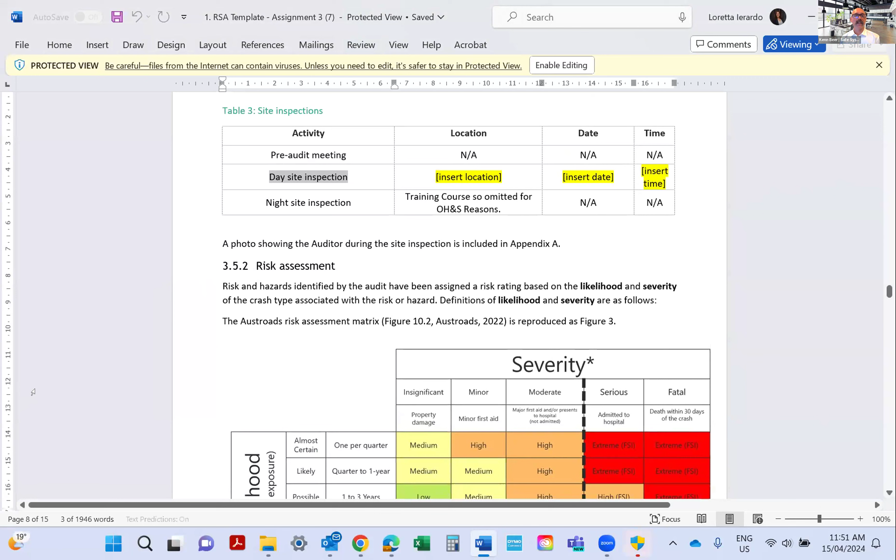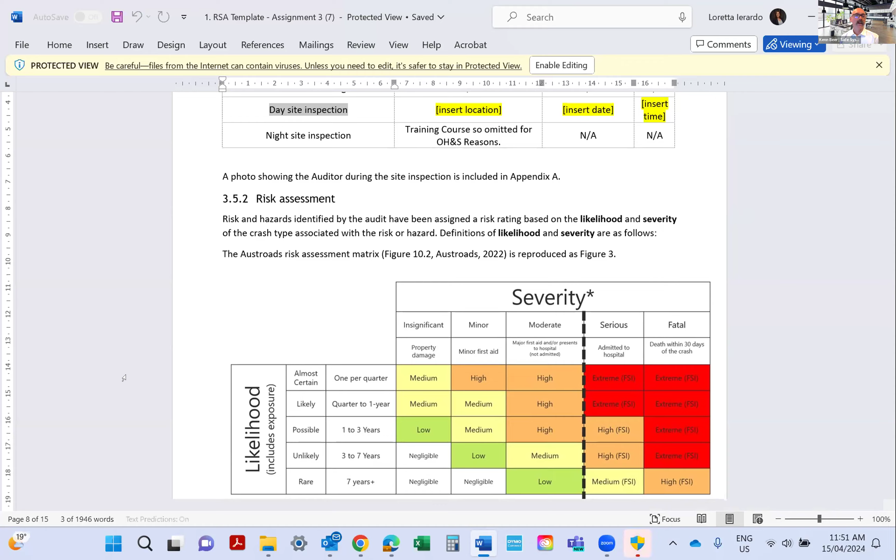And also there we've said we don't want people going out at night. So we only want you out there during the day, but we do require you to go and visit the site. Even though it's a design stage, we require you to visit the site. So you put the information of that in. This is just general info.

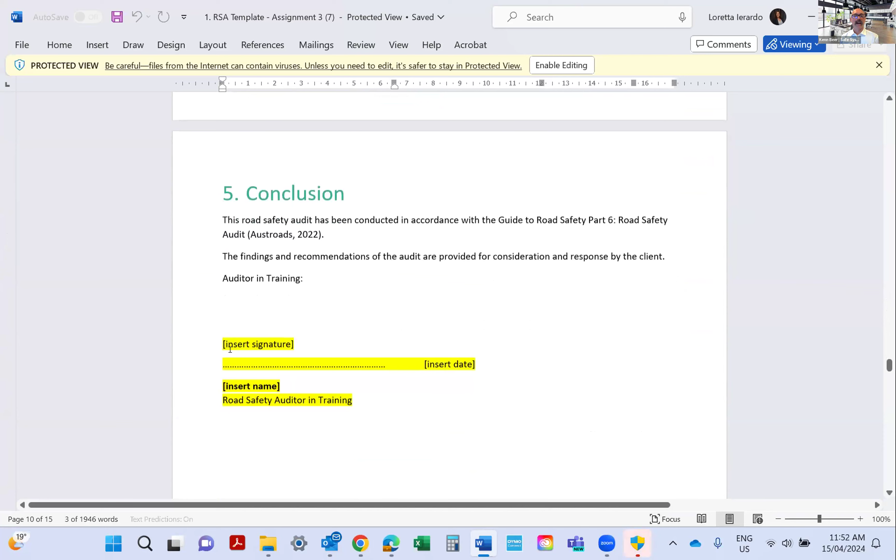Now, after you've done everything, you'll give your sort of overarching comments, but you'll have to have done all your work first to usually come back to that. And once you've finished everything, you sign it. You actually sign it off. That's part of the audit process.

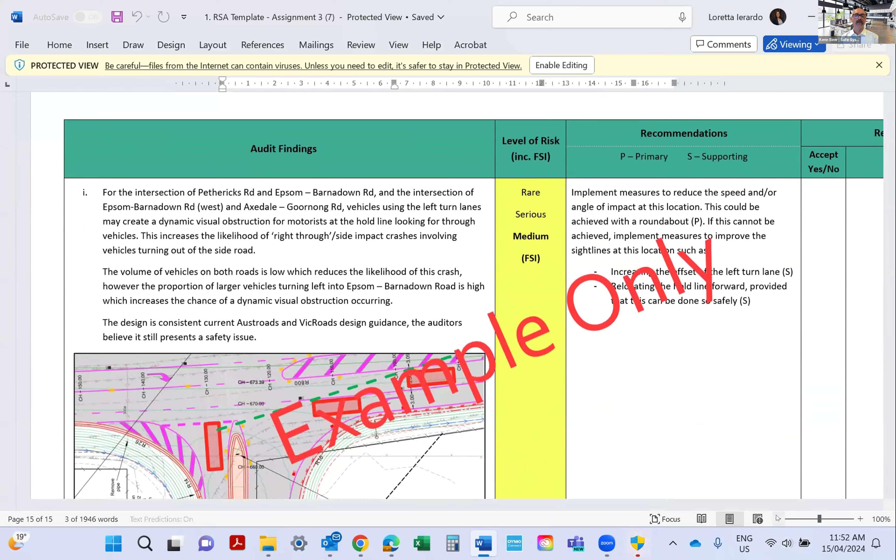And there's only one photo we want from this, and that's just to show us that you did go to the site. So there I am out in New South Wales somewhere in Sydney, take a selfie and just replace that. In a real audit, you'll give lots of photos of the site, the surrounds and everything like that. For this assignment, just give us one photo, show us you went to the site. Be wearing your high-vis vest too. We want to see you in a high-vis vest in the photo.

And then this is the meat of the actual audit from the technical perspective. All of that other stuff is important to the audit process, but this is what you're going to do. You're going to provide us 3 audit findings, only 3, right? You might pick up 25 issues, but you're only going to pick 3 of them and write them up. But you are going to write them up properly, right?

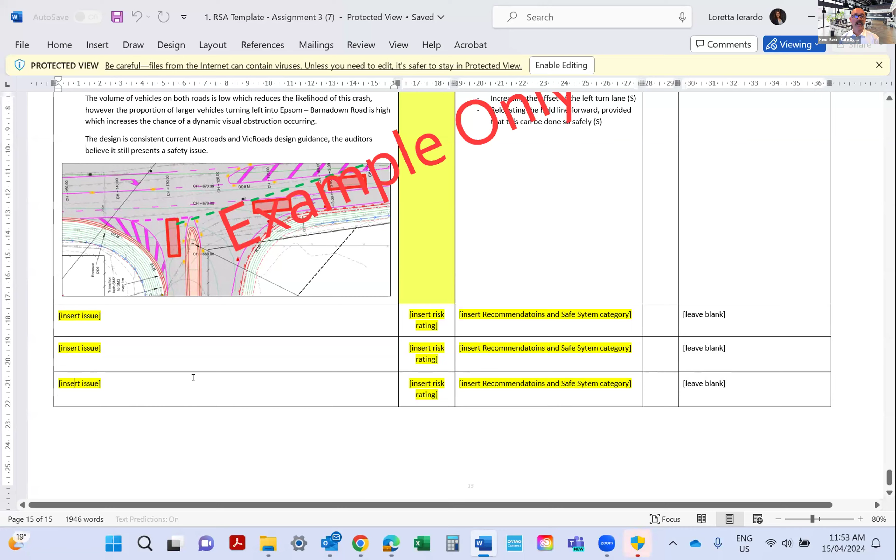And we've given you an example above there of good practice. So you can go, oh, okay, I see, I'm sort of following these elements. That's a different site, so you won't be able to repeat that. You're going to have to identify it, but we want it written out properly. And I'll tell you how the markers are going to look at this. They're going to say, have they followed the formula for audit findings? Is there a nice photo or little diagram so I can see what they're talking about?

Have they provided a risk rating? Is that risk rating in accordance with the risk matrix up above? Have they colored that cell the corresponding color to the risk matrix? Have they used FSI if it's to the right of the line in the risk matrix, in the risk table? Have they provided a recommendation? Have they categorized that recommendation into primary or supporting?

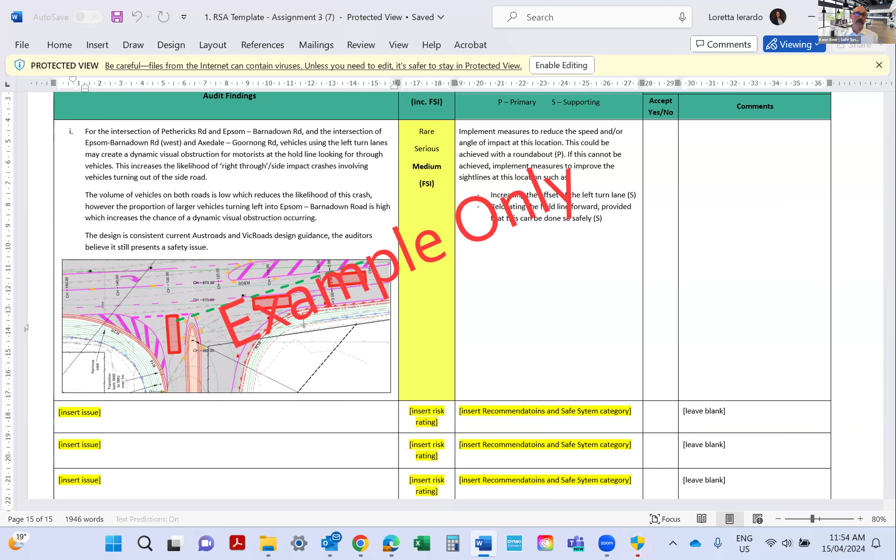I think that's about what they will look at. They will make some commentary around the reasonability of the audit finding, whether the risk rating is very high or low or those sort of things. That's not pass-fail stuff, usually that's just guidance. Usually just being able to follow that process and correctly fill stuff out is where you're going to go. But we're just looking for 3 findings. That's another way to keep this within check in terms of the time commitment.

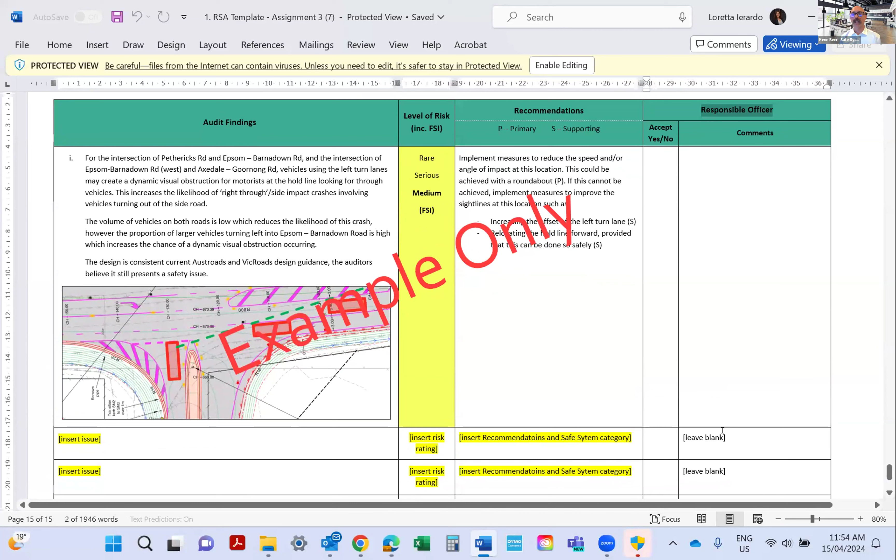You leave that right column blank because as an auditor, that's not your responsibility to fill any of that out. That's for whoever receives this report in an audit, the council officer, the department officer, the project manager, whoever it is. So you don't fill that out.

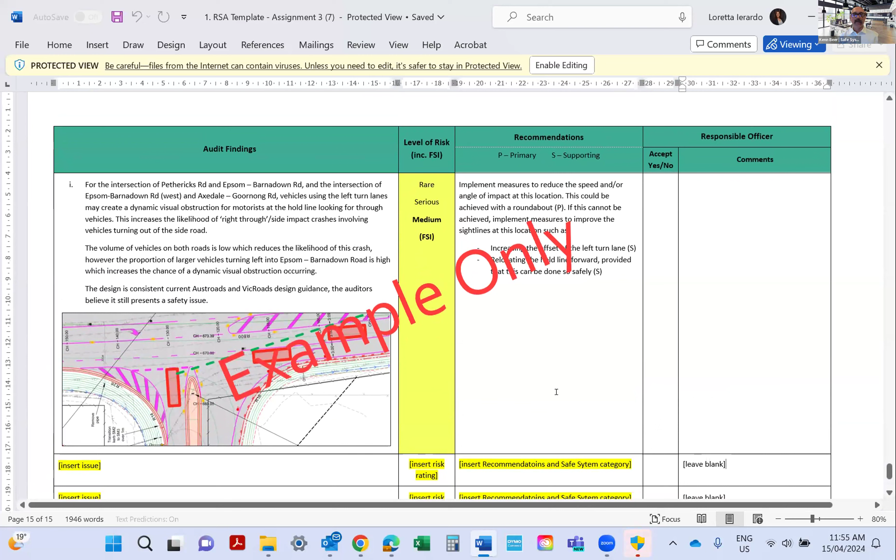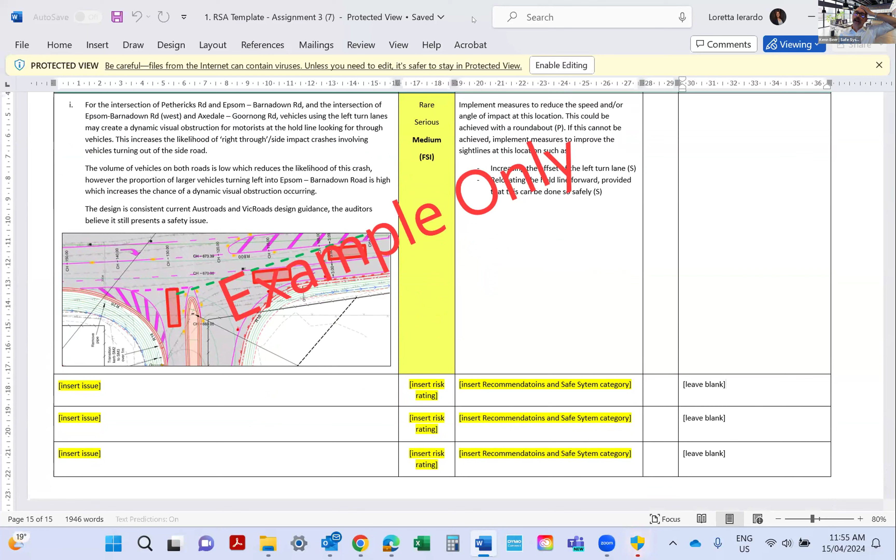So once you've done all of that, you'll fill those 3 out and then you'll go back and write that little summary, overarching comments or whatever. And then save it, PDF it, and follow Loretta's instructions. Drop it into the learning management system.

Now, if you are there going, I don't quite understand this, I'm concerned about this, what if I can't find any issues, any of those things, don't get too concerned because we have senior auditors available to help you through this, to coach you, to guide you.

A question's come in: are you doing this in groups? Okay, so it's a good question. Thank you. Some of these sites, you'll see there's a couple of people listed, and you can go out there together if you know that person or you want to, and chat about it, but you need to submit one report each, and they can't be the same, right? So you're each having to come up with your own wording and findings and the like.

Now, we wouldn't mark you down if two people had found the same issue, but it was obvious like they wrote it up themselves and it was that sort of stuff. But you do need to submit your own report. Of course, in a real audit, you would be in a team and you'd only do one report, but for this, for training purposes, we need to be assured that you know that process.

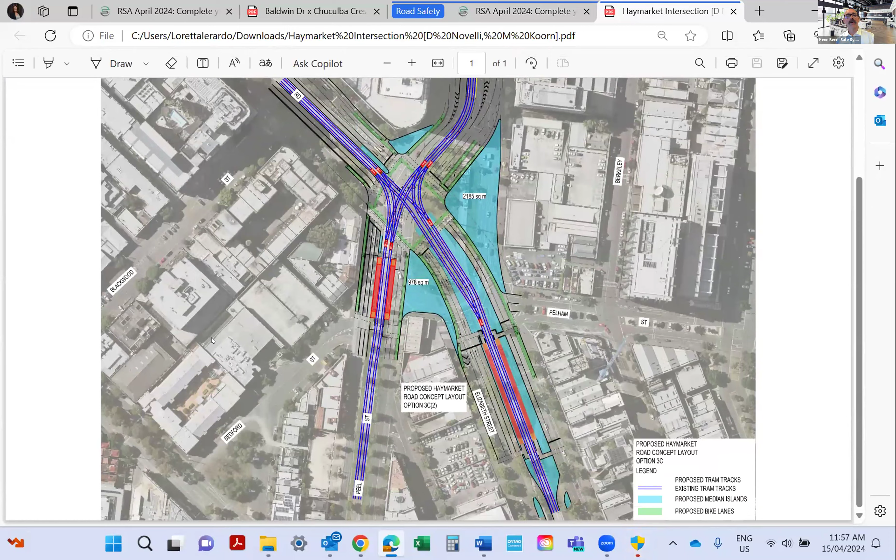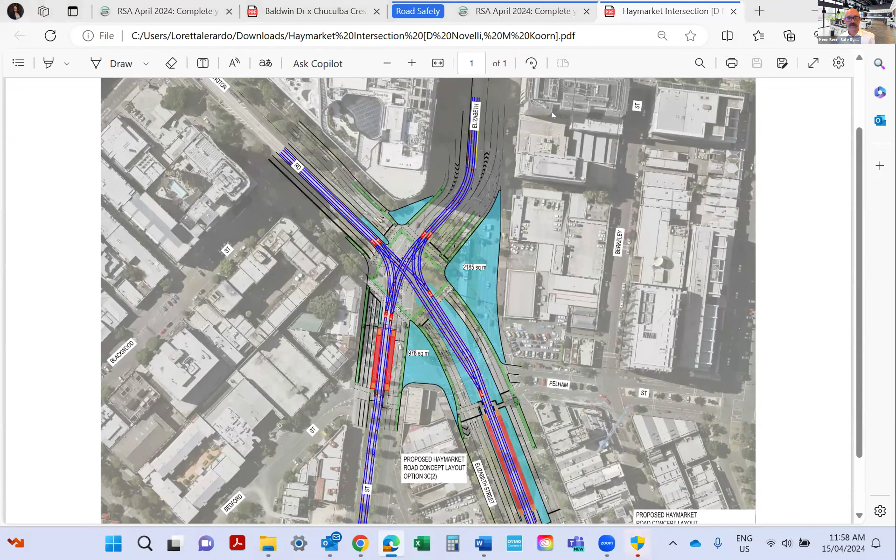Download it. Make sure you know where it is. Make sure it is convenient, you're not going to have to travel a long way to get there. Look at the safe work method statement. Make sure you're comfortable that you will be safe.

Download the template. Make sure you know everything, and then our next session is a great opportunity for you to ask any questions. We've allocated a lot of time to just discuss anything that anybody's already confused about, or what is this intersection, or what kind of issues would you be expecting here. We don't need you to find the highest risk issues, we just want to find issues and write them up nicely. But we've got time allocated in the next session for that if anybody does want to have a chat about their audit, and others will learn from that.

Don't miss anything, Loretta? No, covered everything, I think. So that's great, thank you.

Yeah, well done, everyone. You've got to the point in the audit course now where you prove you understand the audit process and you can identify issues. Next session, I'll be taking you through some of the things around accreditation, legal liability, a bit more policy, road safety audit policy in different jurisdictions when they're done, and those sort of things.